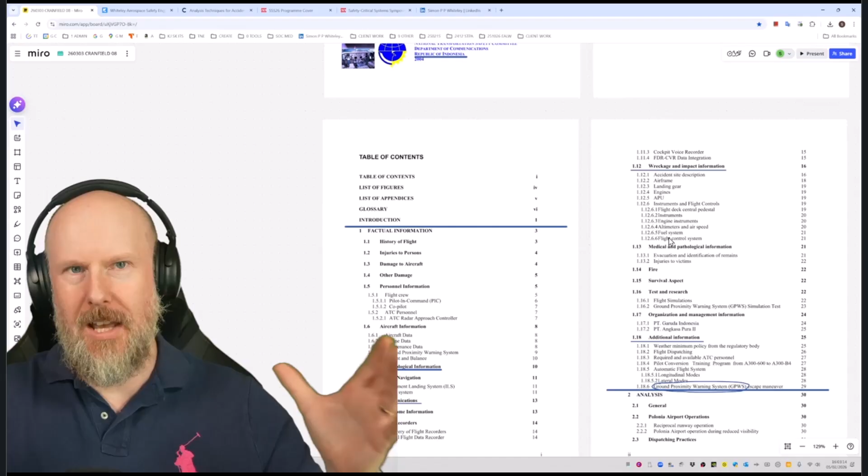In case you're not aware, this type of air accident report has essentially a standard structure, as most civil air transport investigation reports have, because they're created in accordance with ICAO Annex 13, which gives guidance on how to conduct an investigation and what a standard report structure should be.

Now, we've already been through section 1, which is the factual information. If you want to go back and watch that again, please visit live stream number 1 and live stream number 2. I think there's some links in the comments, but if not, I'll add them immediately after this session.

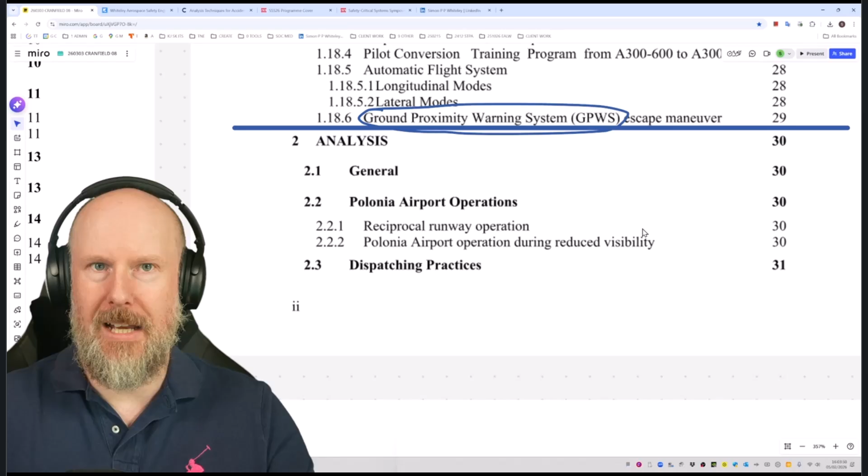Then we've got section 2, which is the analysis done as part of the investigation. We got through all of that in live stream 3 and then 4. So today we're going to be focusing primarily on section 3 conclusions, section 4 recommendations, and of course if you've got any questions, comments, concerns or experience you want to share, please type them in the chat and I'll get to them as best I can.

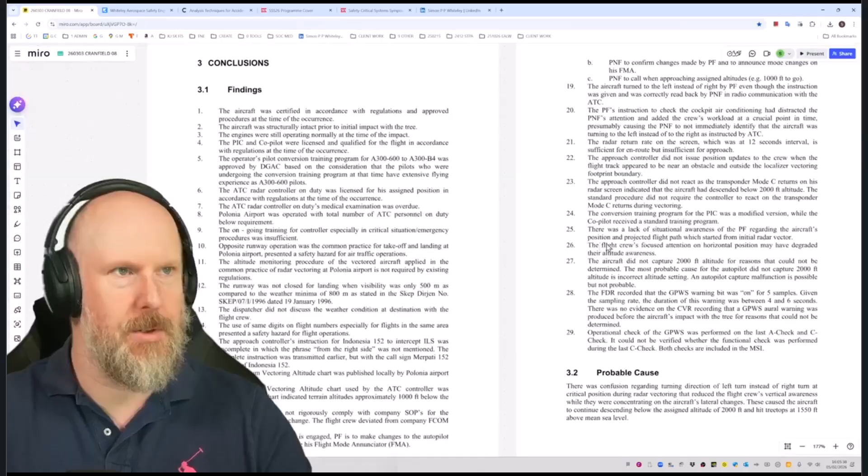Let's zoom in on here so you can see it. So this is section 3, conclusions. The first part of that is findings, section 3.1.

Now it's important to understand, and it goes without saying, but I need to say it: this investigation was done back in 1997, 98 onwards, so it's a good few years ago now. And of course, they haven't used the STAMP-based approach, CAST or STPA or anything like that. So as we're going through this, we just have to be mindful of the context of that investigation, because of course we're looking at it through a different lens, so we're going to think about and focus on different things. My comments are not criticisms of the original investigators or their investigation - I'm just looking at this through the perspective of if we were to apply CAST, STPA, STAMP today, what are the kind of questions we would ask, equipped with that capability?

So, number one then: the aircraft was certified in accordance with regulations and approved procedures at the time of the occurrence. So that's a certified aeroplane. But then, being a little bit facetious, so was the 737 Max. But we won't talk about that today.

The aircraft was structurally intact prior to the initial impact with the tree. The engines were still operating normally at the time of impact. The pilot in command and co-pilot were licensed and qualified for the flight in accordance with regulations at the time of the occurrence. I touched on this yesterday.

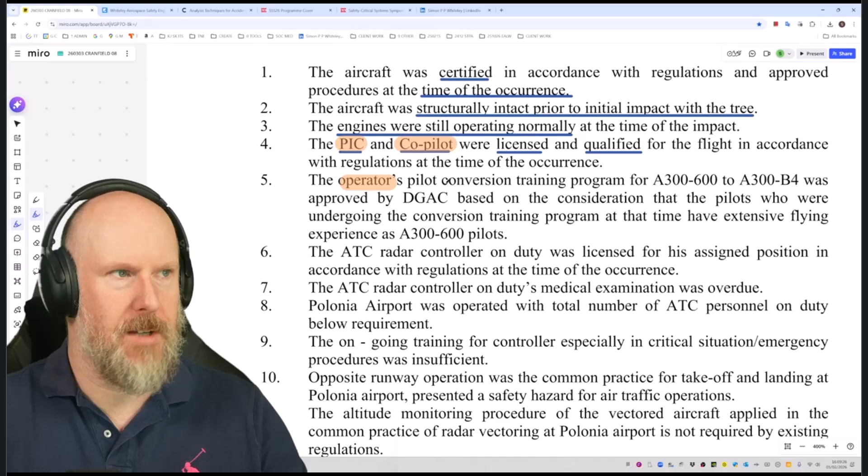Okay, the operator's pilot conversion training - the operator is certainly a controller that's going to appear in the control structure, and they have a pilot conversion training program. I'm highlighting them as a candidate controller because that training program isn't just going to be some training materials, a slide pack and an instruction manual - it is a program, so it's perhaps going to have a training organization, it might have a testing, qualification and certification organization. So I'm highlighting that because I'm probably going to have to dig into that, or at least think about digging into that.

They recognise that there is a training conversion program from A300-600 to A300B4 - these are two different marks of the same aircraft, if you like, with different human-machine interfaces, as I highlighted earlier on. And it was approved by DGAC, which is an Indonesian organisation.

They might be relevant for my control structure, but I'm thinking they're probably not, so I'll highlight it but not include it. That's why it's yellow. Based on consideration that the pilots undergoing the conversion training program at that time have extensive flying experience as A300-600, so having extensive flying experience is important context.

Okay, so the ATC radar controller - they are absolutely going to be in the control structure model, 100%. On duty, was licensed for his assigned position, in accordance with regulations at the time of occurrence.

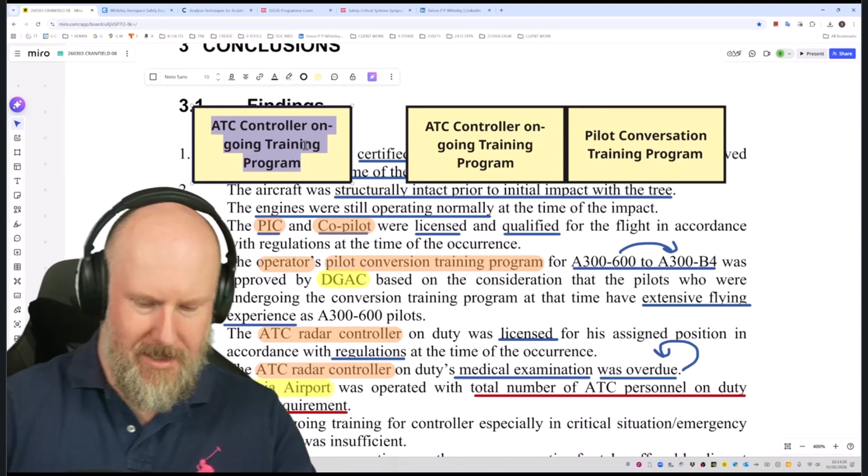We could put the medical examination on there just for completeness. There we go, examination process - let's just change that one there. That's the ATC medical examination process. We've already got the airport management, but I'll stick that in there now while I'm at it, because I don't want to miss it, for the purposes of this presentation, this live stream. Airport ATC leadership. There we go, so that's in there.

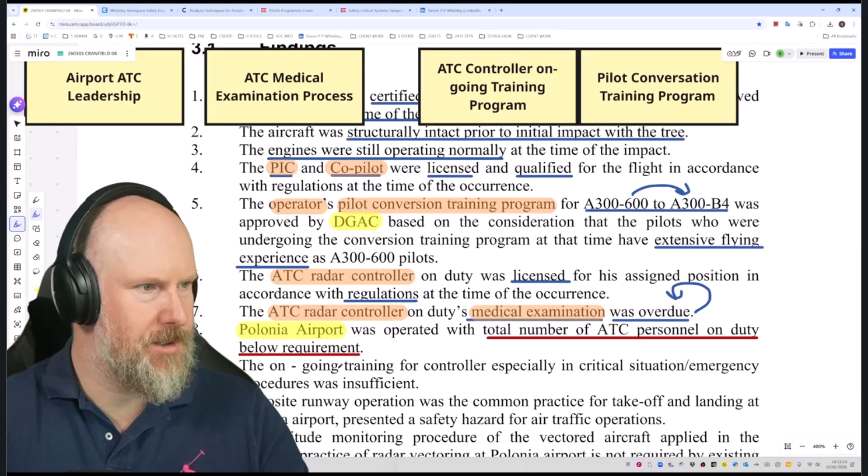Let's put that there. Ongoing training for the controller - yeah, we've just highlighted that, so let's change that orange. Especially in critical situation emergency procedures was insufficient. So should I mention those procedures? Yeah, why not, let's do that. Let's stick that in - ATC critical situation emergency procedures.

Opposite runway operation was the common practice for takeoff and landing at Polonia Airport, presenting a safety hazard for air traffic operations. So let's highlight that - opposite runway operation. Now, whether it's a safety hazard or not, there's a bit of an academic perspective to this, because clearly they can operate takeoff and landing in opposite directions. It's just probably not such a good idea, especially under certain conditions.

But there should be, in theory, an ATC airport analysis that covers that situation, and they may have, should have, would have, could have - I'm implying because I don't know, but it's likely, hopefully, that somebody did a safety assessment for that, and the outcome of that safety assessment, because they were operating, was acceptable to somebody. Whether the risk was actually appropriate or not from an independent perspective, perhaps not. And I think that's what this is implying - it probably isn't a good idea to be doing that, but that's how they've presented it.

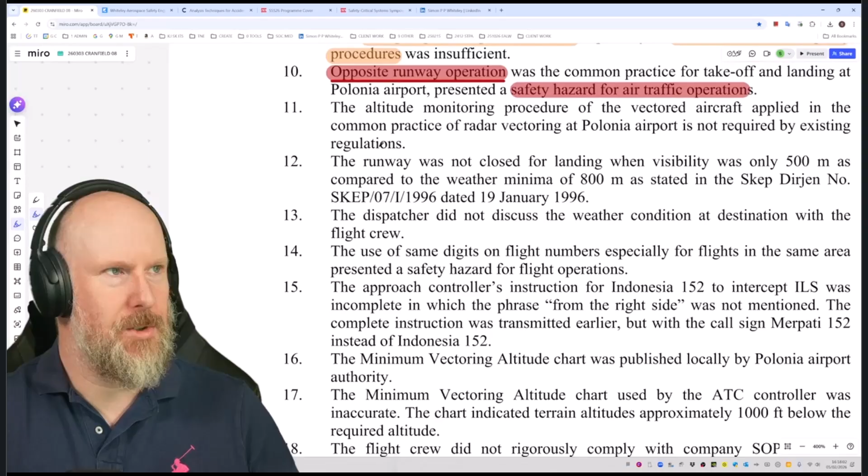Okay, so the altitude monitoring procedure - I'm going to stick that in the control structure, maybe I probably am. Let's stick it in: altitude monitoring procedure of the vectored aircraft applied in the common practice of radar vectoring at Polonia Airport is not required by existing regulations. Is this an ATC procedure?

I think that's what it's implying - of the vectored aircraft applied in the common practice of radar vectoring at Polonia Airport is not required by existing regulations. So does that suggest that there is something missing from the existing regulations?

Where's that just gone? Right - ATC altitude monitoring procedure, let's stick that up there. There we go - is not required by existing regulations. So does that suggest there is a hole in the regulations? Perhaps there should be. So there's a question there, let's capture that question.

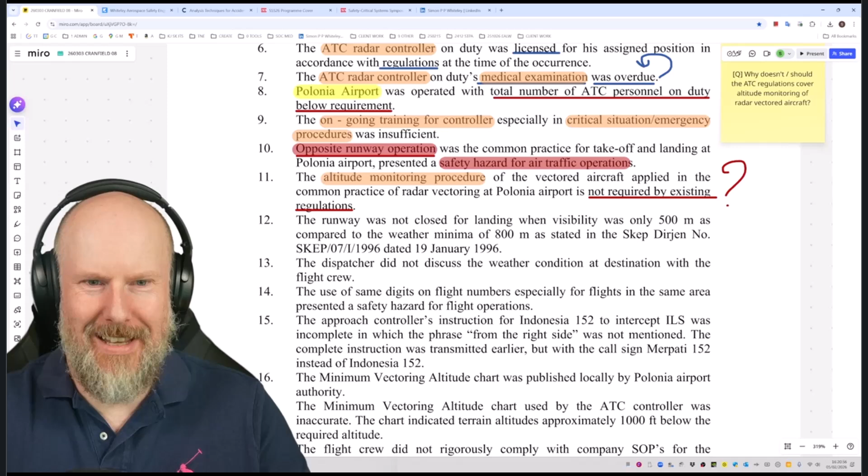Okay, someone's saying something - Florian says, let's have a look. Where's the... got too many screens open. Right, this one, where's my mouse? It's here somewhere. There it is, I found it. Right, what does this say? It's slightly off the screen, so I think I'm going to have to read it out when it works.

Florian says: I also don't know, but I would assume that switching the direction needs time buffers, safety margins between aeroplanes coming from different directions, and this would ultimately be not efficient for most airports today. Yeah, totally on board with that. Therefore, looking at flight radar and so on, I never saw that. Thanks Florian, fantastic.

Right, so let's keep going. The runway - here we go, this is important - the runway was not closed for landing when visibility was less than 500 metres. That is one of the big questions from an airport leadership controller perspective: why did it make sense not to close the runway, even though government regulations suggest they may close it? It's probably a good idea during that context. So that is a contributory control action, let's capture that while we're at it.

I don't know what the number is, so we'll come up with that later on. So this is the airport - oh, don't crash on me now, Miro, come on. Airport - I think it's authority, I think that's the term we used the other day.

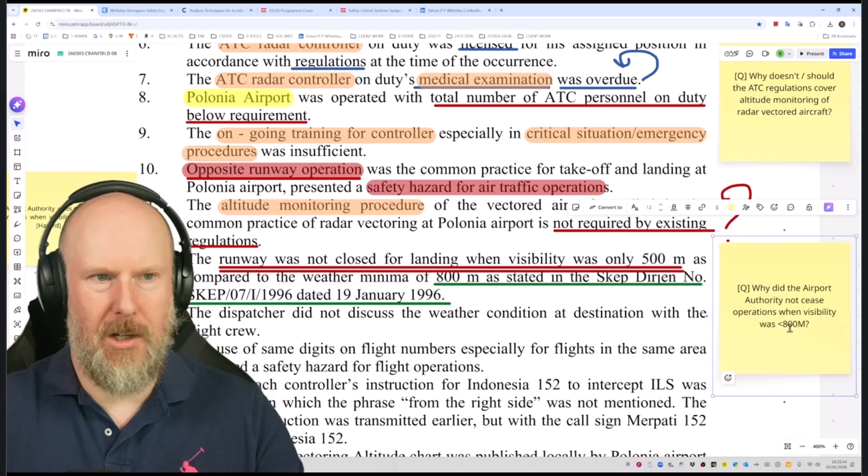Visibility, what was going on? What was the context within which that decision was made? Now, I'm not absolving the fact there may be some serious issues going on, but of course we've always got to be open that perhaps there's a genuine reason why they believe they didn't need to close the airport, for whatever fantastical reason. We don't know yet. We don't know. Okay, so the dispatcher.

So let's highlight that. I think they may need to go into the control structure, maybe, perhaps. I've captured them earlier on, but... well, yeah, let's include them. It says that they did not discuss the weather condition at the destination with the flight crew. So you could say, is that a contributory control action? Let's just capture that.

Airline dispatcher does not discuss destination airport weather conditions with the flight crew when destination weather is out of limits, trending out of limits, or actually out of limits. So I'm going to make that as generic as I can. Is that a bit too small on the screen actually? Let me make that a bit bigger. There we go, 18, that's a bit bigger, isn't it? Let's make those 18 as well. No, that's a bit too big now. 14, 18, no! It doesn't like that. Okay, Miro, come on. Let's just put auto then, fine. Size, auto, there we go.

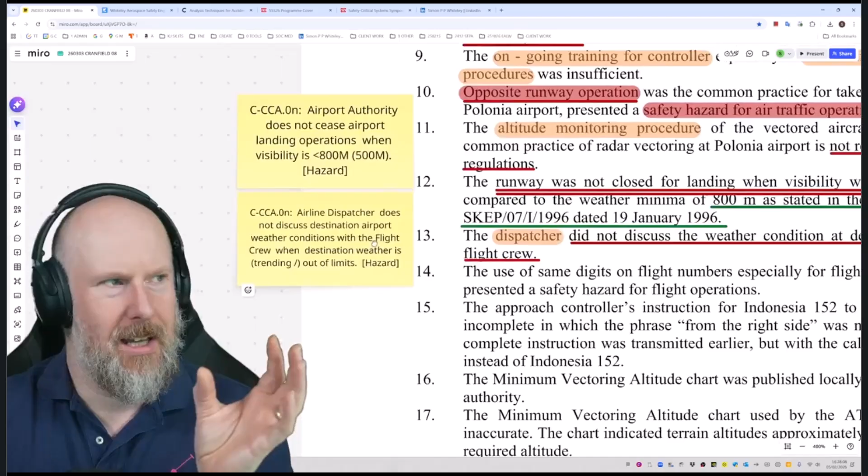Airline dispatcher does not discuss destination airport weather conditions with the flight crew when destination weather is trending or out of limits. And you'll notice I put double spaces in there. The reason I include double spaces whenever I'm writing control actions or unsafe control actions is they help you see the parts of a control action. There's a formal specification to an unsafe control action or a contributory control action, and that is broadly: the controller we're interested in provides a specific control action when, and then a specific context. The context is what makes that control action unsafe. So whenever we're thinking about what is an unsafe control action, we have to think about the compound of the control action itself with a specific context. That context relates to the control process of that controller or of the overall control process for the control structure model you're creating. It can be quite challenging defining contexts, and it's a common issue everybody has. If you've got any questions about that, please feel free to reach out to me.

Okay, so the use of same digits on flight numbers, especially for flights in the same area, presented a safety hazard for flight operations. There we go. And just to emphasize, the word hazard, that label for the concept, is not the same concept when we talk about hazard in STAMP. That's why I use square brackets all the time, to emphasize whenever you see my work and I use square brackets, I'm referring to the specific definitions used in the STAMP literature, the STPA handbook. Because hazard can mean many things to many people, all the way from literally anything that has the potential to cause harm, which is a very broad, unhelpful definition. In fact, it leads to people getting distracted and going down a path that wastes a lot of time and resources and takes it away from actually dealing with proper hazards.

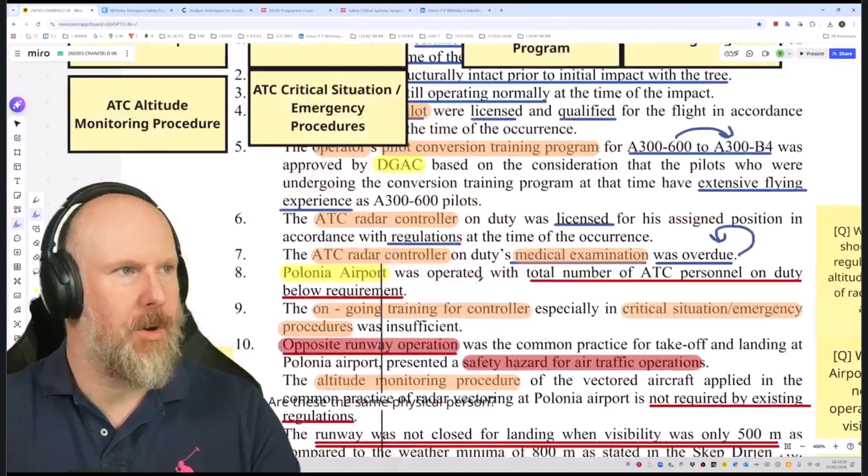Fantastic. So the minimum vectoring altitude chart was published locally by the Polonia Airport Authority. That is the formal label for this controller up here. So we've got ATC Airport Leadership - that should probably be called Polonia Airport Authority.

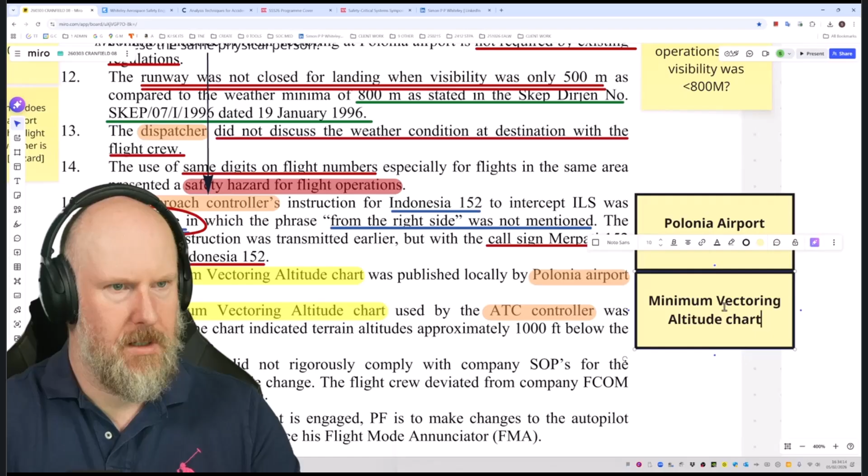There we go, so let's put that there. The minimum vectoring altitude chart was used by the ATC controller, and that influences the air traffic controller. So where are they? Let's put that in there - used by the ATC controller, was inaccurate.

So it was inaccurate anyway. The chart indicated terrain at altitudes approximately 1,000 feet below the required altitude. Wow, that's quite bad, that's not good at all.

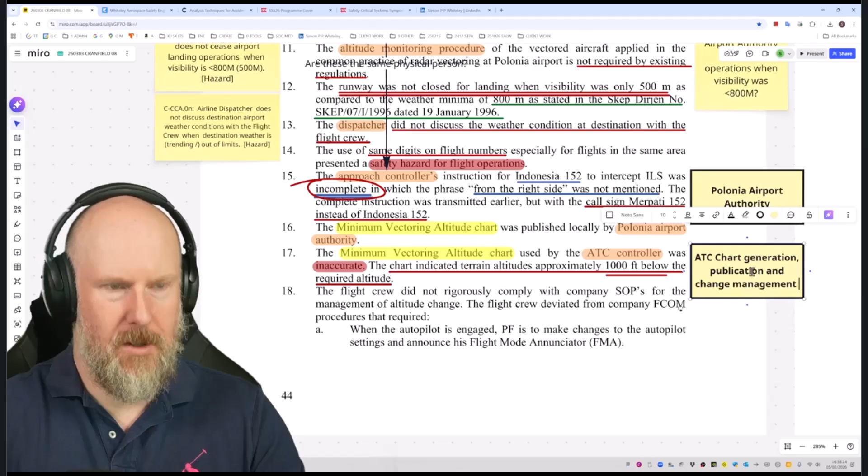Okay, so for it to be so wrong, clearly the investigation should consider looking at the ATC chart generation, publication and change management organisation, whoever, whatever they are. I know that's a bit of a broad, wide definition, because I'm not an expert in this field - if you know a better definition. That could be an airport organisation, it could be a combination of airport personnel and maybe the national air traffic provider or government regulation, or it could be a private company external to the airport who creates the charts. And so that question of what is the controller involved in the creation of those charts and the change management of those - that could be a whole new branch, maybe even a new part of the investigation.

In fact, one of the CAST investigations done by Paul Nelson that's on the MIT website - I think it was a Comair accident at Lexington Bluegrass Airport in the US, where the aircraft took off on either a closed runway or a taxiway. They took off on a runway that was too short. The reason was because the chart describing the layout of the airport didn't contain information about some groundworks going on. So they thought they'd gone on to the main correct length runway, but in fact they'd stopped short and gone onto the shorter runway, which goes off in a slightly different direction. They didn't recognise that situation, and that's what set the scene for the accident. In that case, I think it was Jeppesen charts - there was a question over the currency of those charts, and this is the same sort of topic.

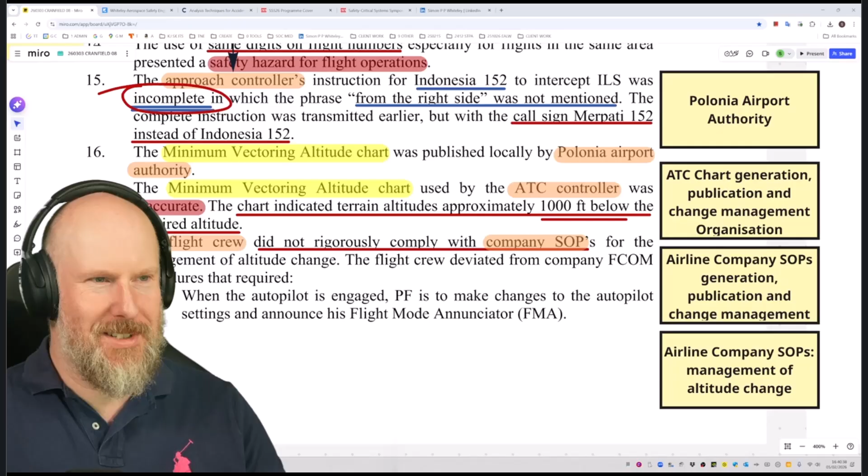It's fantastic. But of course, it means you can spot things really quickly, and sometimes people might not like that. They might get a little upset that you're pointing at things they might not want people to recognize, or there might be issues that have been put on the too-hard pile and forgotten about. And you, as a fresh-faced person with fresh eyes, spot these things from round corners, and they just get a bit upset that you're pointing at these things. But yeah, that's one of the challenges with this method. But that's what you want - you want a method that can do that.

Okay, so the flight crew did not rigorously comply with company SOPs for the management of altitude change. The flight crew deviated from the company FCOM procedures. Right, so let's put that one there - airline company FCOM procedures. There we go. So I'm going to put airline company SOPs, manuals, procedures, management of change. There we go, yeah, that'll do.

Hang on a minute, have I just ruined something? I have, haven't I? Let me just undo that. No, that was right, wasn't it?

Airline company SOPs generation, publication and change management organisation. And then the ATC chart generation, publication and change management organisation. So they are two organisations. And we have the airline company SOP manuals, and then we have the company FCOM procedures. The ATC one's disappeared, hasn't it? Oh no, it's over there. Altitude monitoring procedure, yeah, okay.

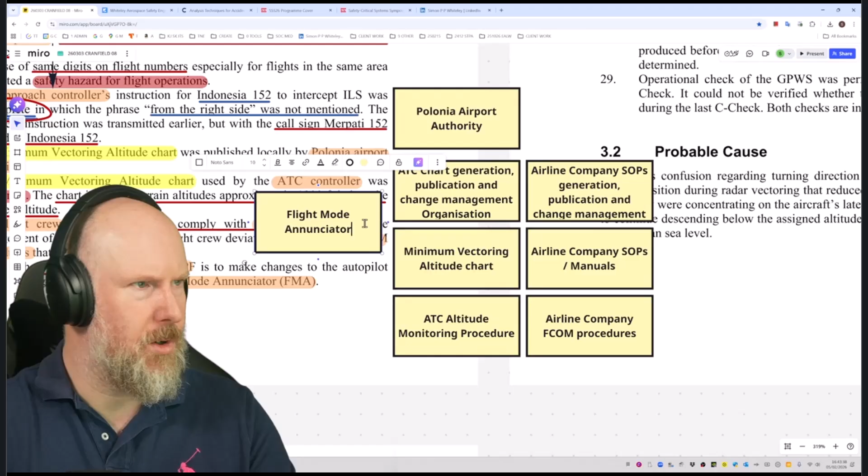So let's... flight mode... I can't remember how to spell annunciator. There it is. Annunciator. FMA. Okay, so that might be important.

So there's sort of two control actions there, broadly speaking. You've got the first one, which is make changes to the autopilot settings, and then the second one is announce his flight mode annunciator. So he might have done the first but not the second, or he might not have done either. And there is a sequence dimension to that as well, because there's always the possibility logically that someone could announce the change but not actually complete the change properly.

Okay, so let's have a look. Pilot not flying - so they are definitely in the control structure - to confirm changes made by pilot flying and to announce mode changes on his FMA. So there's two of those: confirm changes, announce mode changes. So the pilot not flying, to call when approaching assigned altitudes.

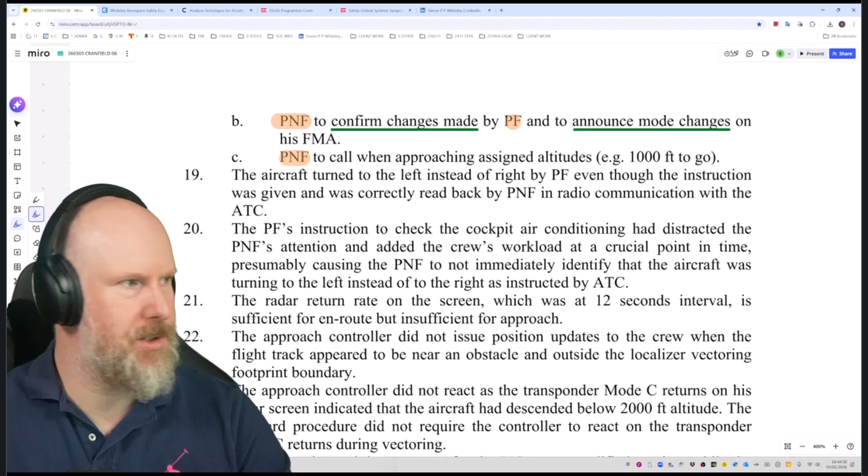And they didn't do that, I don't believe. The aircraft turned to the left instead of the right by pilot flying, even though the instruction was given and was correctly read back by the pilot not flying in radio communication with ATC.

The pilot flying instruction to check the cockpit air conditioning had distracted the pilot not flying's attention and added the crew's workload at a crucial point in time, presumably causing the pilot not flying to not immediately identify that the aircraft was turning to the left instead of the right as instructed by ATC.

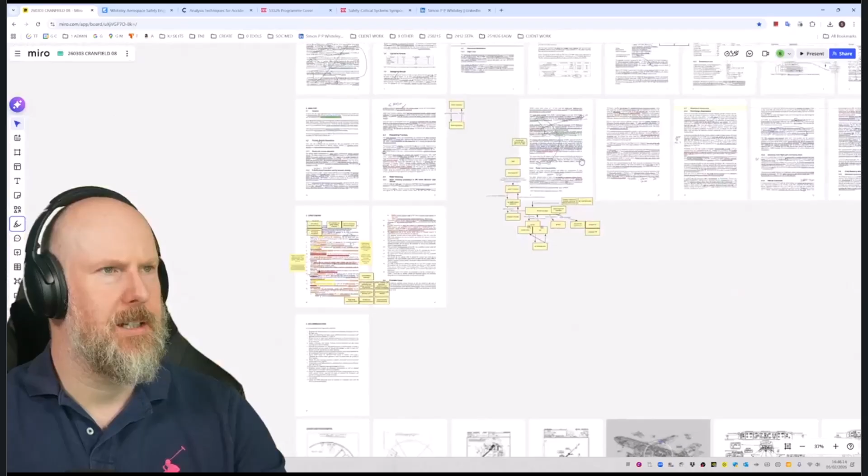The radar return rate on the screen - so radar, that is in the control structure elsewhere, I think. Let's just zoom out, have a look. Oh, we've added there the feedback loop. Radar controller, radar speed 5 RPM, 12 seconds. So we've not actually included the radar as a specific sensor. And that's, in fact, a good point, actually.

So one of the questions is: is a radar a sensor or is it a controller? It kind of depends how you as the analyst or modeler want to include it in your control structure. So you could just treat it as sensory feedback from the control process, or you could treat it as an explicit sensor. But you could also treat it as a pseudo controller in the case where you can change the settings of the radar. I don't think it's mentioned in this case, but some radars you can turn different settings on and off. So there is a control algorithm of some description in terms of what type of behavior that radar might have.

But again, ideally you should just treat it as a sensor, but it depends if it's relevant to your investigation. If there's an issue with the radar, you might want to look into it, model it explicitly and add detail. So let's have a look. So radar, the radar return rate on the screen, which was at 12 seconds interval, is sufficient for en route air traffic control, but insufficient for approach.

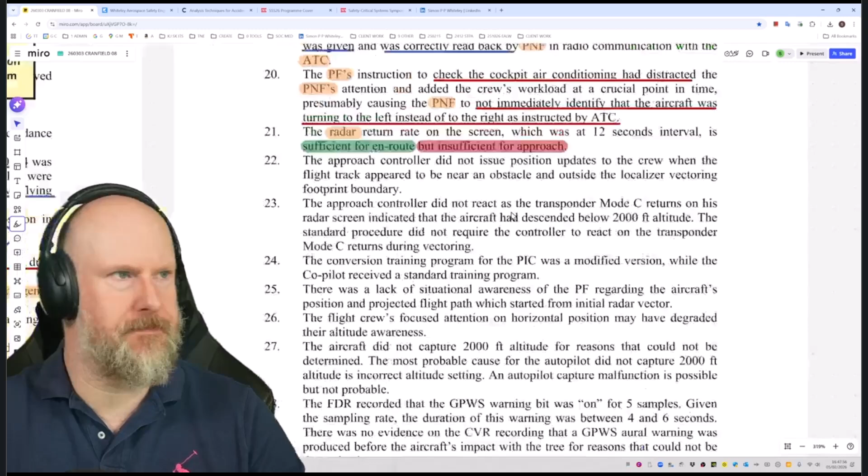Okay, so let's have a look. Polonia Airport Authority - why was the radar with, what did we say, it was 12-second interval? Can you see that? Okay, let me zoom in. Why was this radar with 5 RPM, 12-second interval in use for use in this type of radar vectoring air traffic control?

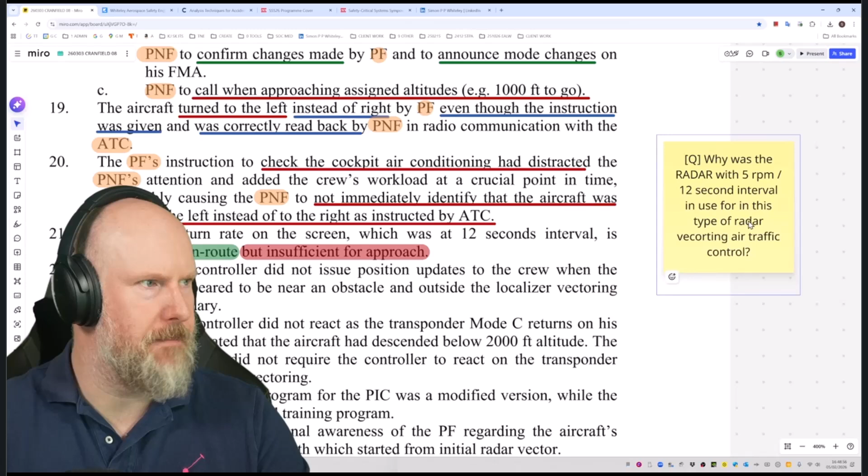There we go, so put that there. Okay, the approach controller. Let's just check that - approach controller, radar controller, approach controller. So the same name, is it the same person? Did not issue position updates to the crew when the flight track appeared to be near an obstacle and outside the localizer vectoring footprint boundary.

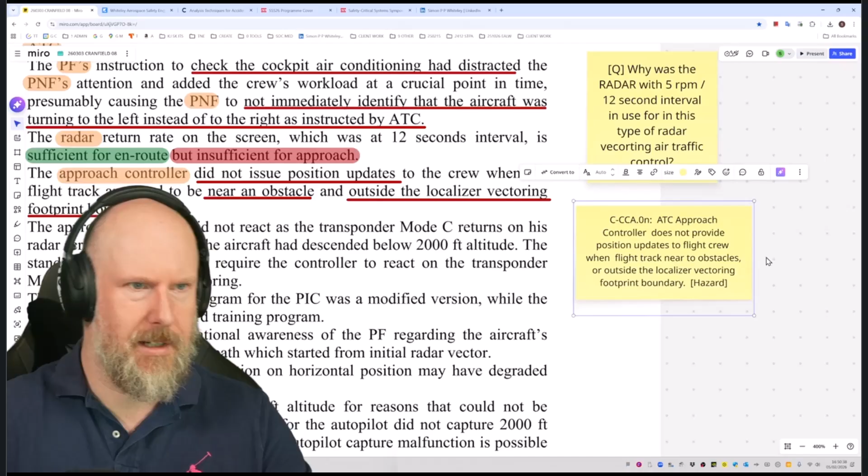So let's... oh, no, not that one. Let's put another contributory control action there: ATC approach controller does not provide position updates to flight crew when track near to obstacles or outside the localizer vectoring footprint boundary. So ATC on approach does not provide position updates to flight crew when flight track near to obstacles, or outside the localizer vectoring footprint boundary.

So why is that? Okay, right, let's have a look. The approach controller did not react, as the transponder mode C returns on his radar screen indicated that the aircraft had descended below 2,000 feet altitude. So let's document that one.

ATC approach controller does not... well, what is the reaction? What do they need to do? Does not provide TBC reaction when transponder mode C returns indicate aircraft below 2,000 feet altitude.

So ATC approach control does not provide TBC reaction, because I don't know what that reaction is. Presumably it's, I don't know, get on the radio, climb, pull up, I don't know.

When transponder mode C returns indicate aircraft below 2,000 feet altitude, I'm presuming - and correct me in the chat if I'm wrong - it's the information from the aircraft transmitted to the secondary surveillance radar, and then that information appears on the ATC controller's workstation radar screen. So Flight Radar 24 shows information about altitude, track and speed - that is transponder derived information. I think that's how it works.

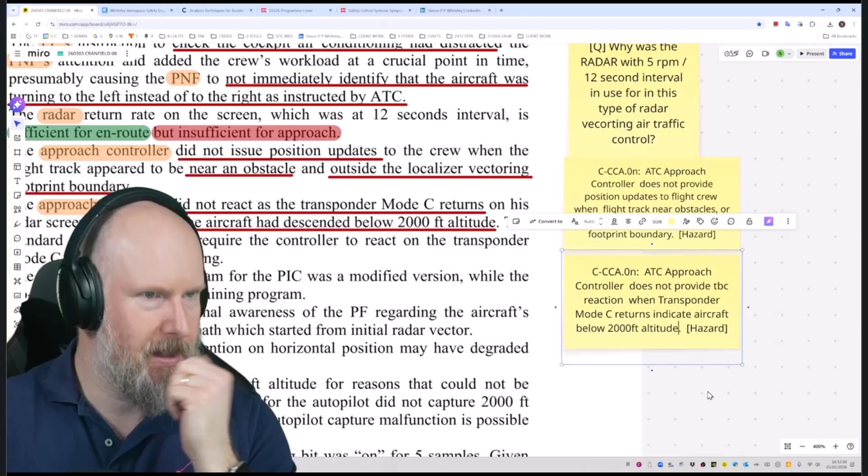So why didn't they do that as well? The standard procedure did not require the controller to react - well, that's why then. That explains why. So they did not provide TBC reaction because they're not required to. So is that an issue? Is that a problem for the controller? They didn't do what they should have done because they weren't told to do it?

So the standard procedure did not require the controller to react during vectoring.

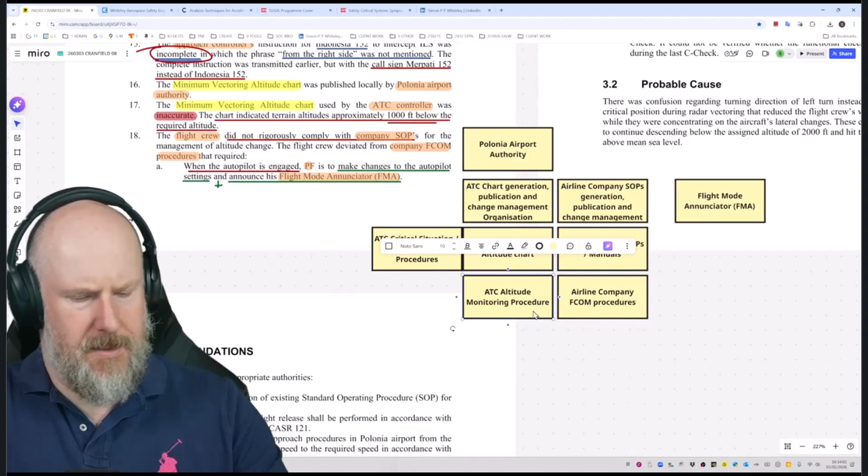So standard procedure, where is it? ATC, minimum vectoring altitude chart, monitoring procedure, emergency procedures. Let's put that over here as well. Flight mode annunciator. So, emergency procedures, vectoring chart, altitude monitoring procedure. I think that's related to this, isn't it? Yeah, I think it is. Okay.

The conversion training program for the pilot in command was a modified version, while the co-pilot received a standard training program. Okay, so that's interesting. I think we're going to have to think about that, add that to the control structure. So we've got a pilot conversion training program, and we've also got a pilot standard training program.

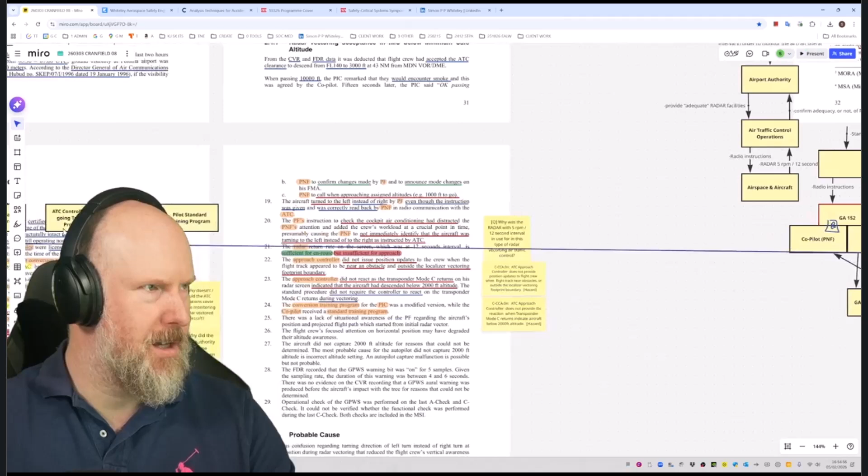Yeah, okay, so the pilot in command - pilot in command is there and there. Right, let's steal this arrow. There we go. So pilot in command received the modified version - conversion - and the co-pilot received a standard training program.

Interesting. Why was that then? And does it matter? Does that matter? Potentially a contribution. Yeah, so there was a lack of situational awareness - everyone's hot topic, what does situational awareness actually mean - of the pilot flying regarding the aircraft's position and projected flight path, which started from the initial radar vector.

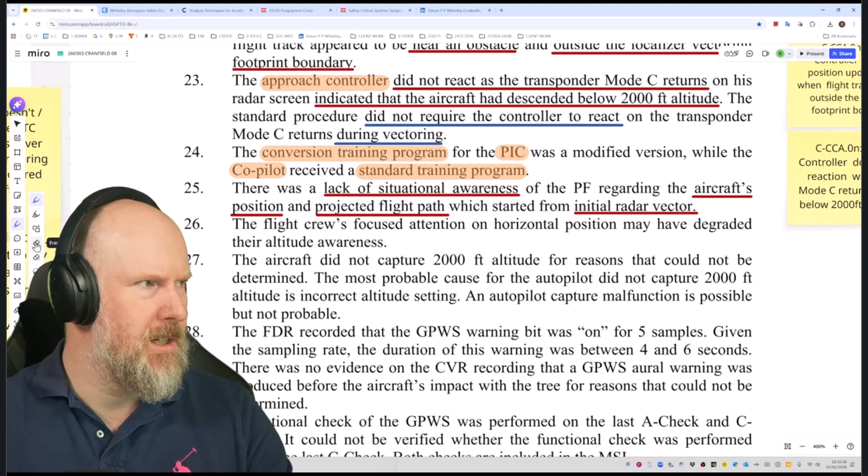So when we talk about lack of situational awareness, what we're sort of hinting at is there are issues with the mental model, the process model, the beliefs of that particular controller. In this case, it's the pilot in command, the pilot flying, who was the pilot in command at the time.

The flight crew's focused attention on horizontal position may have degraded their altitude awareness. So again, that's human factors aspects - distraction, focused attention.

The aircraft did not capture 2,000 feet altitude for reasons that could not be determined.

So if you watch the last Livestream 5, we did talk a bit about the control loop for the GPWS ground proximity warning system, but also the autopilot flight control system. I think there were sufficient questions over the behaviour of that which might have warranted, with hindsight, knowing what we know with STAMP and CAST, a more detailed investigation of that, instead of being given the line that the probability of that scenario is 10 to the minus 10 or whatever ridiculously small failure rate number it is. Because there may have been a systematic design issue with the design of that system, which is what is hinted at from looking at it through the lens of a control loop.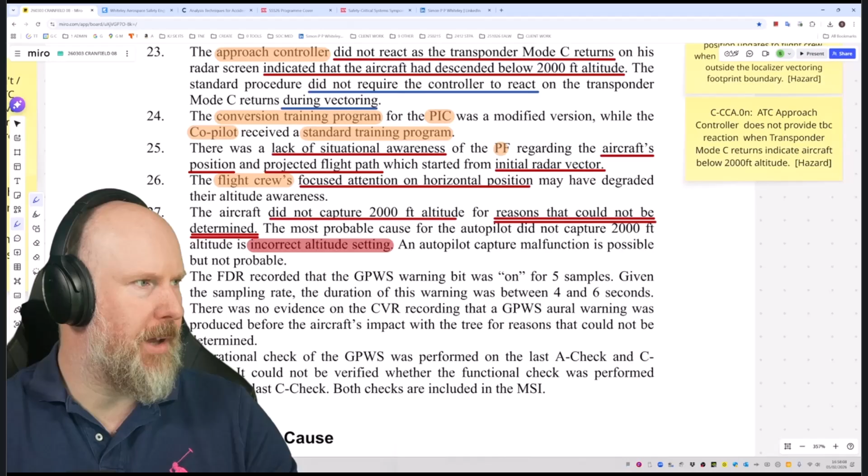But of course we don't have enough technical detail in this report to really look at that in a lot of detail. Okay, so the most probable cause for the autopilot not capturing 2,000 feet altitude is incorrect altitude setting. So that is a control action from the pilot in command or the person interacting with the aircraft. An autopilot malfunction is possible but not probable.

Okay, so I think what we should do is consideration should be given to the control loop for the autopilot, and how a contributory control action might occur.

We touched on this last time on Tuesday, so if you want to go back and watch that replay, you can. It's quite interesting actually. I think there's potentially a missed opportunity there to look in more detail. But we're saying this with hindsight, and we haven't seen the detail of what these investigators did behind this investigation report, because they're not going to publish everything. They'll publish enough to show what they've found, but not necessarily everything that's not relevant. So I could be asking questions that are answered, but just not in the official investigation report.

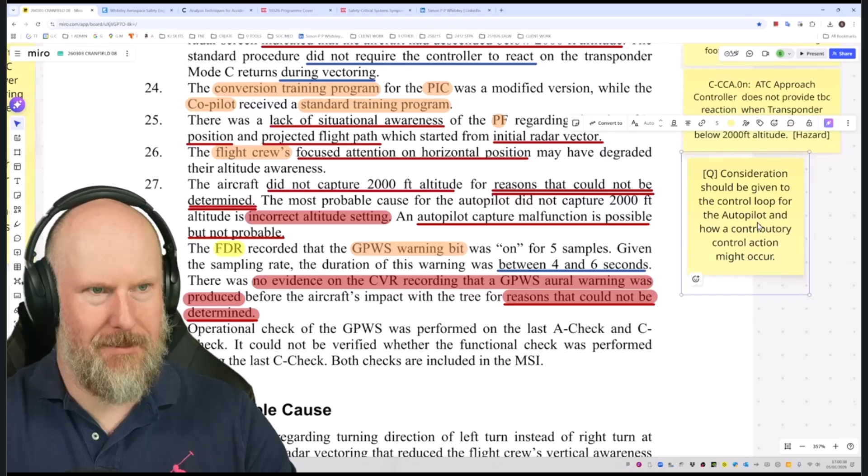There was no evidence on the CVR recording that a GPWS aural warning was produced before the aircraft's initial impact with the tree, for reasons that could not be determined. So that is certainly prime for consideration - consideration should be given for the GPWS and how...

There we go. There is obviously an academic question there over - well Simon, is a GPWS aural warning a control action? Well, it's kind of six of one and half a dozen of the other.

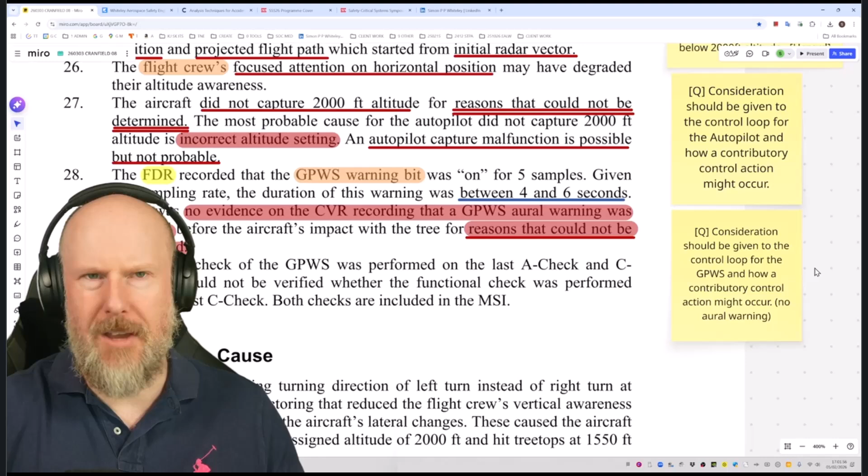If you want to do a good analysis of the design of a GPWS, you'd treat it as a contributory control action, or an unsafe control action if you're doing an STPA. So the GPWS does not provide aural or visual warning when certain context is met, and you would explore the control loop for that and identify the causal scenarios that lead to that. Now, of course, if you treat it like a feedback, that is a contributory causal scenario of the human operator not providing the control actions they're supposed to. So you would identify the contribution, but it makes sense to analyse it as though it is a contributory control action, if that makes sense. It's kind of six of one and half a dozen of the other.

So then the operational check of the GPWS was performed on the last A check and C check. It could not be verified whether the functional check was performed during the last C check. Okay. Both checks are included in the MSI.

What is an MSI, everybody? MSI, maintenance specification item - there we go, that's what that is. So both checks are included in the maintenance specification, whatever it was.

Right, so there is a question there over what is the control structure for providing the GPWS operational check, and why could it not be verified that the check was performed during the last C check?

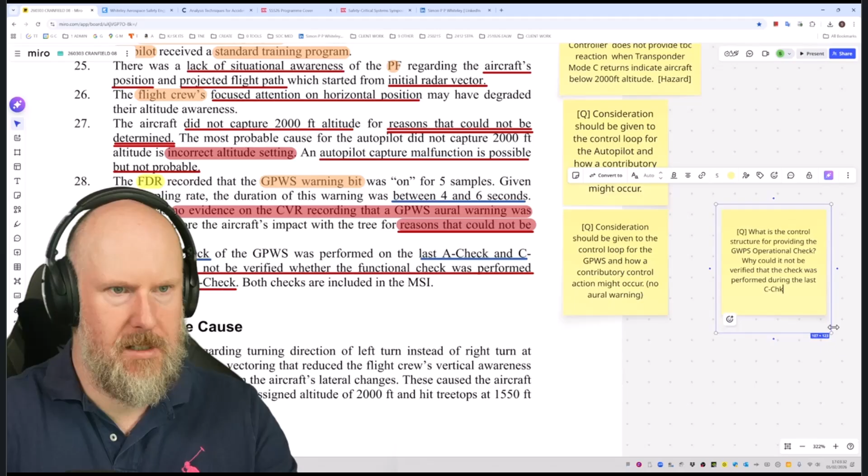So that's something you could explore with a control structure model. There isn't enough information in this investigation report to really talk about that, other than to say here's a GPWS that needs checking. What is the control of the maintainer, the maintenance group, the maintenance organisation that provides that functional check? What or how is that documented or captured? So what is the documentation system, or the way that they keep track of these things? Because this could be a one-off for this one thing, but it could also be a maintenance issue that doesn't just affect these kind of checks, but other more serious checks.

If there are more serious checks, other checks as well, one of the recommendations I'd argue should be: let's go and have a look at the maintenance organisation. Let's have a look at how this check was not verified - is it just a documentation issue, or is there a wider systemic issue here? Okay, so that's all of that stuff.

The probable cause then - just before I go into that, let's hold that for a second. Given all of the things we've done in the last four, and now this fifth live stream, and building bits of control structures, we're going to draw them together after this.

But I'm hoping you can see that the approach to doing a STAMP-based analysis, and thinking about things through the lens of a control loop and a control structure - a jigsaw piece and a jigsaw - can really open up the creative thinking and identifying questions that you wouldn't normally think to ask. I'm hoping that's sort of apparent.

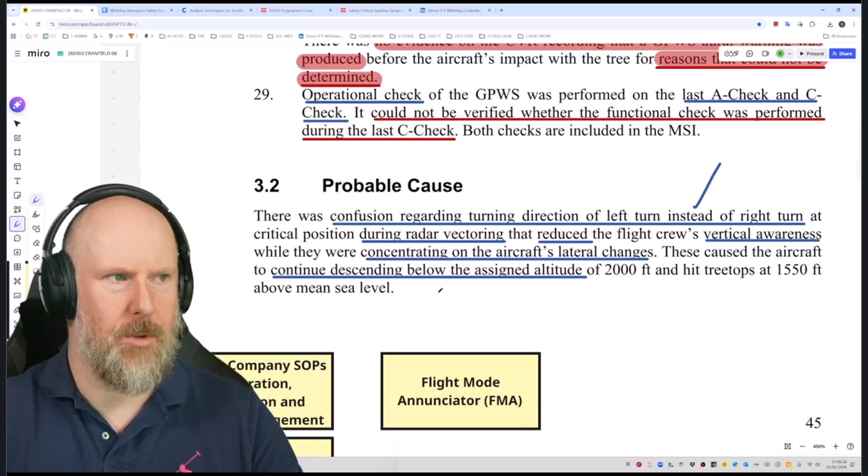Okay. So that is, in terms of time and proximity to everyone being killed and the aircraft being completely destroyed, you can't really argue that there are not issues or questions over the behaviour of the crew, but there are also questions over the behaviour and design of the aircraft, in terms of the way that the automation works, the way that the displays and human-machine interface works.

When you step back even further in time and start thinking through the lens of a control structure model, you've then got the air traffic control contribution. You've got the contribution from airport management and their decision for the airport to be open. I'm not going to say stay open, because that presumes they questioned whether it should be open or not, and we don't know that to be true. Maybe they didn't even think about it, it's just we must operate. Maybe they were not aware or didn't consider the limitations due to

the smoke. Now, of course, that's probably not the case, and I'm being a bit facetious in that, but I'm hoping as you start to think about the broader context of the control structure, there are many other things in there, contributors that can have a bigger contribution than others. So that's interesting, that's interesting.

Okay, so there's no mention of the automation, the autopilot or anything like that. That's not discussed, and I can appreciate how challenging it is trying to draw conclusions and say, well, it's this probable cause and then these other contributors. I know that's a difficult thing to do. So as I say, I'm not criticising the investigators and their report.

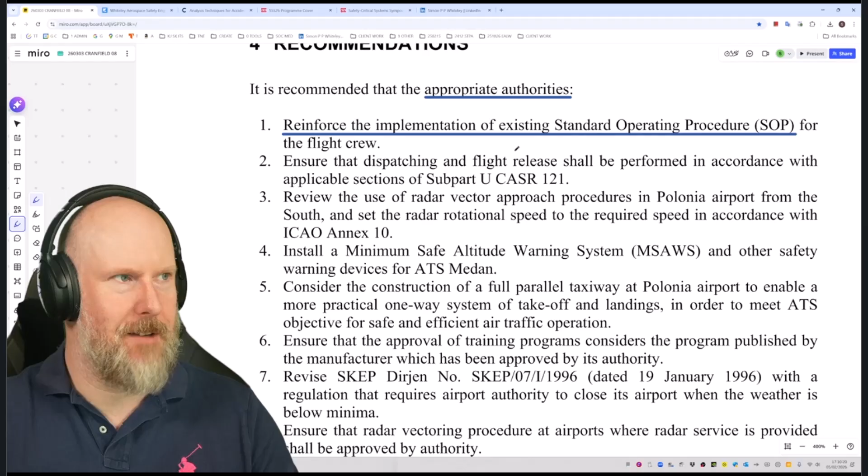So basically make sure the crew know what the SOPs are. Okay, kind of standard. Pardon me. Ensure that dispatching and flight release shall be performed in accordance with applicable sections of Subpart U CASR 121. So I'm assuming that's regulations. So again, that's do more of what you're supposed to be doing, everybody.

No sort of consideration of why they didn't do it like that, you know, or should I say not documented consideration of why. Review the use of radar vectored approach procedures. No. Radar vectored approach procedures in Polonia Airport from the south, and set the radar rotational speed to the required speed in accordance with ICAO Annex 10.

Right, so that's not sort of looked at, you know, there's no sort of investigation, how can I put it, that is not discussed in the investigation report. Why would it make sense for the radar rotational speed not to be set at the correct speed in accordance with ICAO Annex 10? So what I'm going to do is make a good point of this

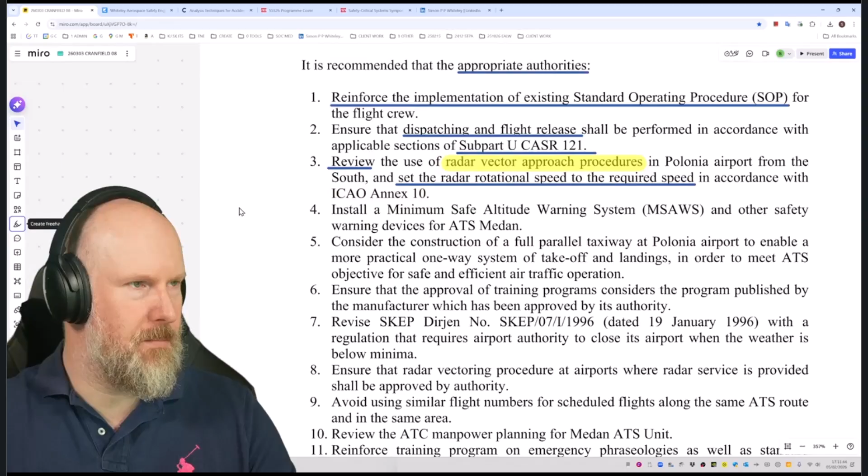just to really stretch your brains. So ICAO Annex 10, and then set the radar rotational speed to the required speed. So this is a control action. This is somebody's control action.

Some real person, real human being needs to set the radar rotational speed to the required speed. So where is that person? Where is the organisation that person represents mentioned in the investigation report?

So if we're building a control structure and we're looking at radar, that radar system is now a controlled process of some radar technician or organisation that sets the speeds of the radar, but also is under the influence of ICAO Annex 10. So why is that control path? I mean, why is it not considered? What is it we should consider? That's one of the things we should look at through the lens of a control structure.

So what I'm going to quickly do is, we mentioned there radar 5 RPM 12 seconds. So if you imagine for a minute that between these aircraft there is a radar system, and I think there's a couple of different radars. There's a primary radar, a secondary surveillance radar, and a lot of other things, but it's a radar system. So above that radar system there will be some kind of radar system management organisation that should set that radar system. Can you see that on the screen okay? Is that big enough for you?

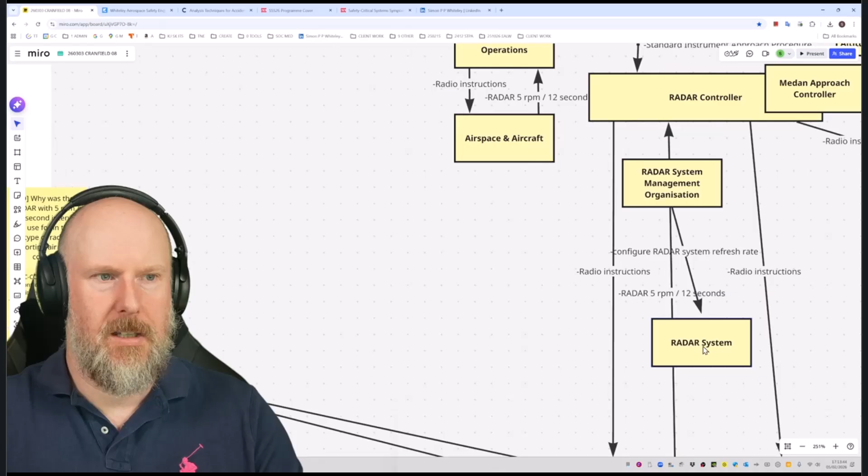So I'll use the term configure radar system refresh rate - I think it's sweep rate, spin rate, something like that. Okay, so that's the control action that this is recommending. So let's put that over there, there we go, it's out of the way. And above the radar system management is this thing called ICAO Annex 10.

Now I'm not familiar with Annex 10, so dare I Google for it. Let's have a look. Annex 10, oh god, it's so complicated. There's so many different things. Which is it? Why can't you just explain? Let's use SKYbrary - no, let's not use that. So obviously it's big and there's a lot to it.

Aeronautical, so there's 19 of these things. So there's volume 1, volume 1, volume 2, volume 2, volume 3, volume 2, 2, 2, 3, 3, 3, 3, volume 5, 4, 4, 4, 5, 5, 5, 6. So it's probably this one, volume 5 - volume 4, surveillance radar and collision avoidance systems, 5th edition. Right, so that's the newest one. Why is that cheaper than that one then?

Right, so this is a bugbear of mine. I'm not going to tear strips off ICAO specifically, because a lot of organisations that set standards and provide documentation, the design of the websites is generally so difficult to understand as a beginner, layperson, and even as experts you can get lost. And the EASA, European Aviation Safety Agency website, is also guilty of this. It's really complex with lots of different languages and standards, and it's just not clear which documents are relevant right now that I should be looking at.

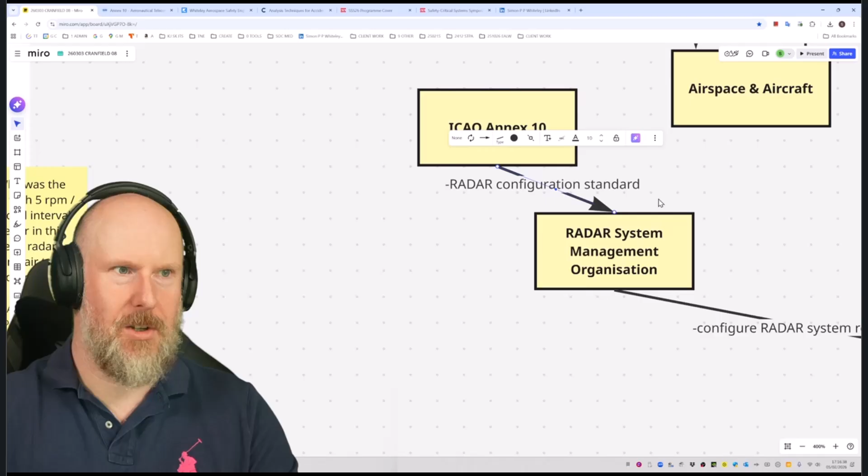I don't know, but let's just say, for argument's sake, that Annex 10 contains information about how to configure radar systems, and it's a standard that you must follow. It's mandatory, let's assume. So if it's mandatory, then why - let's put that there, radar configuration standard, I'm assuming that's what it is. I could probably be completely wrong, but let's assume I'm not. So we've got this radar system management organization who's supposed to be following Annex 10 apparently. I don't know if it's mandatory. So why was the radar system, the contributory control action, why was that not configured appropriately?

Because there might be a genuine reason for it. There might be - maybe it's one of these dangerous successes I always bang on about. It was permitted not to be configured because of some reason that's not discussed or apparently investigated by the report. So our job as CAST-equipped investigators is to go and ask that question: well, why was it not configured that way? If it's supposed to be configured that way, what was going on between the ICAO and Annex 10, and finding its requirements all the way down to the radar system?

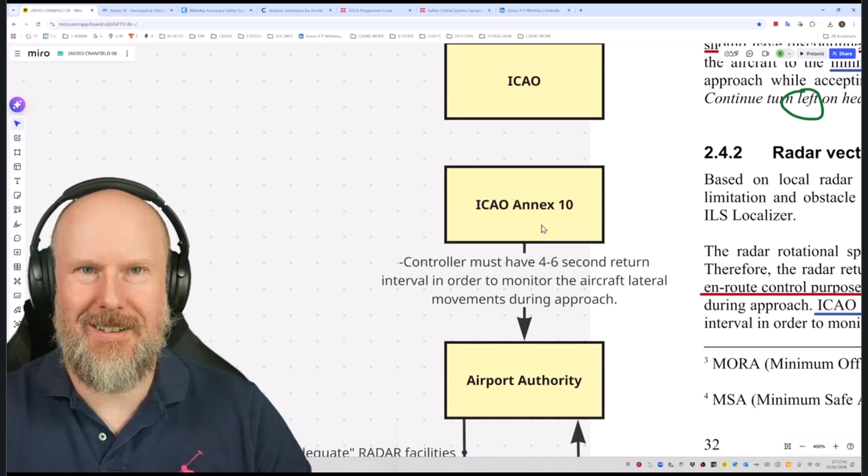What's going on there? That's what we should be looking at, that should be the recommendation. So let's just... oh look, I've already got ICAO Annex 10 in my candidate control structure. Look at that, fantastic, so I've kind of stolen my own thunder from the other day. There we go, let's put ICAO Annex 10 there.

Maybe the control path for ICAO Annex 10 is through the airport authority. We've already seen that there are some contributory control actions related to the airport authority that are not looked at in the investigation report. So maybe this is just a common theme - there are things going on above the airport authority that are just not getting through to the frontline operations when they really should be. As a recommendation, I'd be going and having a look at what's going on there, finding out what is going on. There seems to be a lot of issues at this airport.

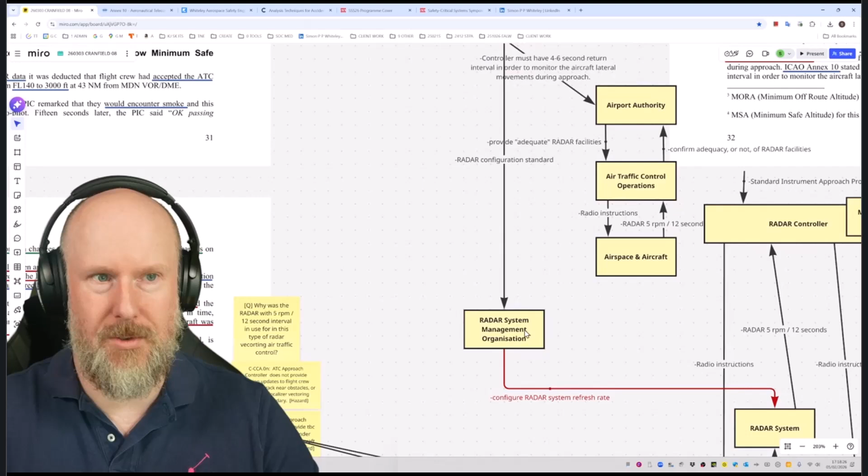I hope that makes sense. I've got a few comments there. We've got Norfolk - let me just get my mouse and put it over there. Do you tend to group the yellow boxes with their associated function?

Yeah, so this is just, how can I put it, my personal preference is to have these, both candidate and certain controllers, in my model, and then mix it together and refine it over time. And then, of course, look at the overall flow of the control structure to make it into a format that makes it easy to explain to other people, easy to communicate to others.

Typically I'll have the control process at the bottom, and as we move up from the direct controllers to the indirect controllers and then the distant controllers in time and space, I will try to group controllers together. In the case of the stuff I've been doing with planetary protection, looking at the design of a spacecraft, I typically group the relevant controllers and information and communication feeds together in a block or area that is common. Where they have common controllers or common management, common leadership, I'll represent them in a box that stretches across the screen.

Because, of course, these are just jigsaw pieces at the moment. When I come to make it into a nice looking, refined control structure model, I am going to change the size of some of these boxes and arrange them in a form that makes it look nice, but also makes it straightforward to communicate and understand. One of the things with these models is you don't want your audience to just have their brains blown out with a massive, complicated control structure model. It really doesn't help, so you've got to think about the audience.

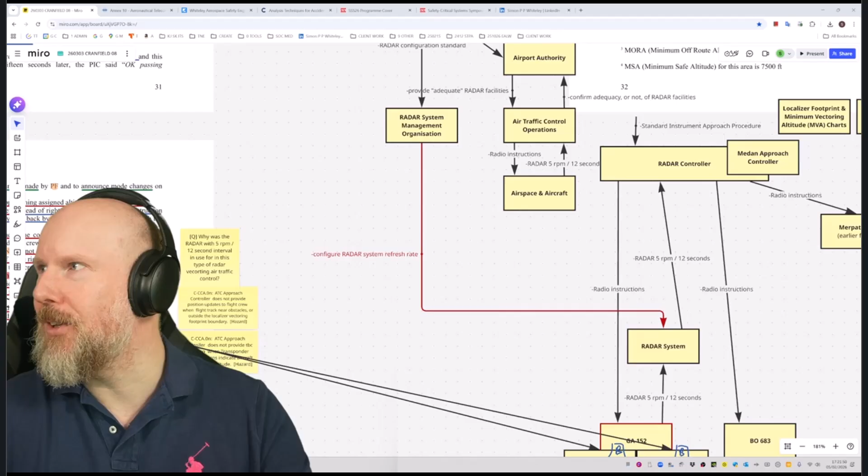I do particularly like your picture, you've got a Nimrod - it looks like an XV. It looks like a Nimrod MR2, or is it an MRA4? Let's have a look at the picture a little bit closer so I can see. It is an MR2, yeah fantastic, one of my favourite aeroplanes, the MR2. Got quite a bit of history with the Nimrod, which I won't go into today, but yeah fantastic. So thank you for that question.

So I banged on about radar systems and Annex 10, so that is a recommendation - they need to review the use of radar vectored approaches and set the radar rotational speed to the required speed in accordance with Annex 10. I would say that should be investigated even further personally, not just 'you need to correct these actions' - I want to know why that was like that.

Northall says, yes thank you, MR2, fantastic, great aeroplane.

Install a minimum safe altitude warning system and other safety devices for ATS Medan. Okay, so it says to install those things. Why were they not present in the first place? Why has it taken a fatal accident for them to decide that's probably a good idea?

And playing devil's advocate, maybe they had a safety assessment that said we need a minimum safe altitude warning system and other safety warning devices for our ATC at this airport. But when that demand was placed with senior leadership, maybe they said no. Or maybe literally next week after this accident they were going to install one. I'm being a bit facetious there.

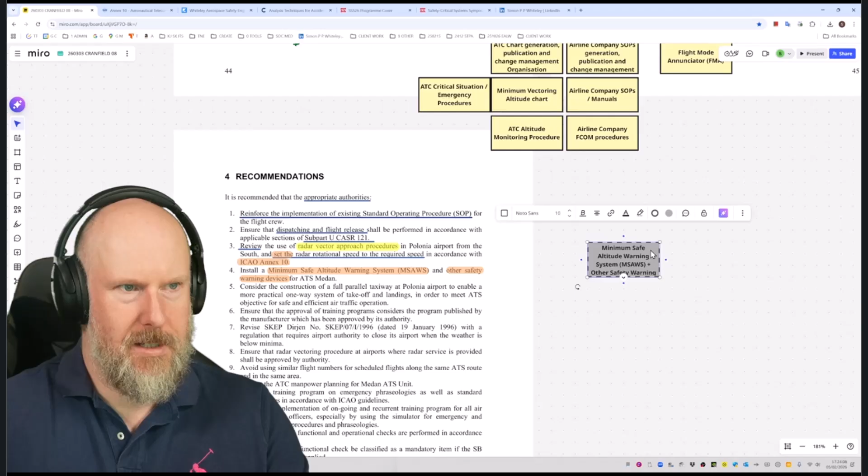MSAWS plus other safety warning devices. I'm going to use a different colour on that, make it grey, and put a dotted line for the border, and make that grey as well. I'm going to make it lighter, because obviously it wasn't there, so it shouldn't be in the control structure because it wasn't there.

It's work as done versus work as imagined. But I'm going to stick it in here just for the sake of saying, well, hang on, they've recommended it should be there. If they recommend it should be there because they think it'll benefit, why was it not already considered for inclusion? Was it considered for inclusion, but for some reason they didn't do it? Why was that? What was the reason for that?

Okay, so I banged on about that. Let's have a look. Number 5, consider the construction of a parallel taxiway at Polonia Airport to enable a more practical one-way system of takeoff and landings in order to meet ATS objective for safe and efficient air traffic operation. Okay, there's not really much I can say about that apart from why didn't they already consider that?

In fact, let me capture those questions because I'll lose the plot. Why were MSAWS and other safety warning devices for ATC, ATS, not already installed?

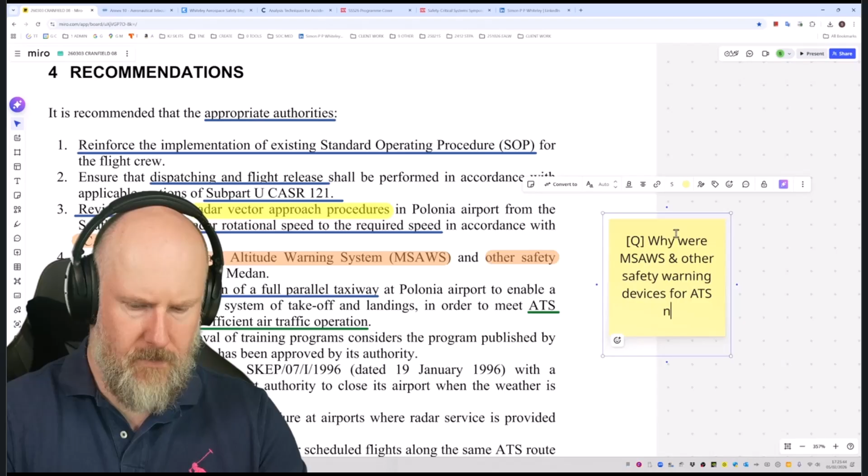Why was there no full parallel taxiway at Polonia Airport? Why was there not already a full parallel taxiway at Polonia Airport? Because there may be some very genuine reasons why that was. I think it kind of distracts a little bit away from the main reason this accident occurred, and that is related to air traffic control and aircraft control, flight path control. But that could be a contributor to other accidents or potential near misses.

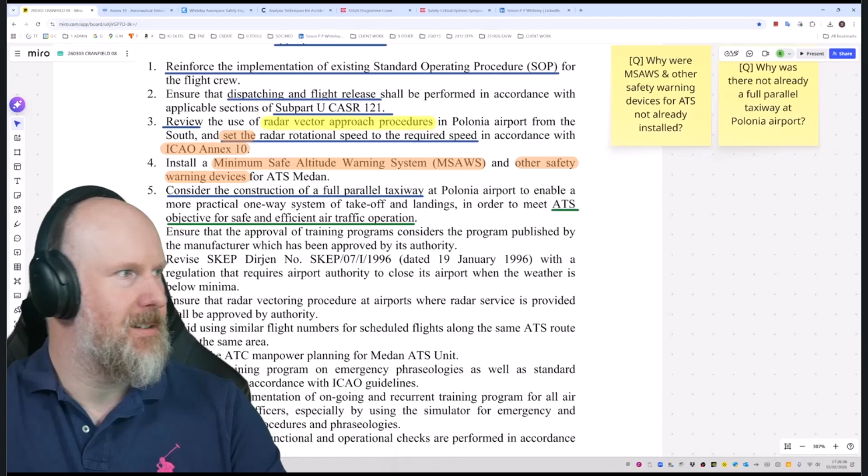Okay, so ensure the approval of training programs considers the program published by the manufacturer which has been approved by its authority. Program published by the manufacturer. Right, so...

Approval of training programs. So who does the approval of training programs? So let's put a logical controller in there. So, pilot training program management. So what were they thinking with regards to these training programs and the decisions?

Did they consider the program published by the manufacturer? If not, why not? Why did it make sense for them to behave the way that they did? Again, for me, that is a hot topic that should be explored using the control structure model.

And I know in the case of the 737 MAX, I know a little bit where they tried to certify it as essentially a new, not very different version of the previous 737. And of course the training and conversion training and everything else was designed to be smaller and shorter, and they missed out, with hindsight, key information about the MCAS. Now I don't think that was an airline making those decisions. I think that was Boeing itself. But it's a similar sort of thing.

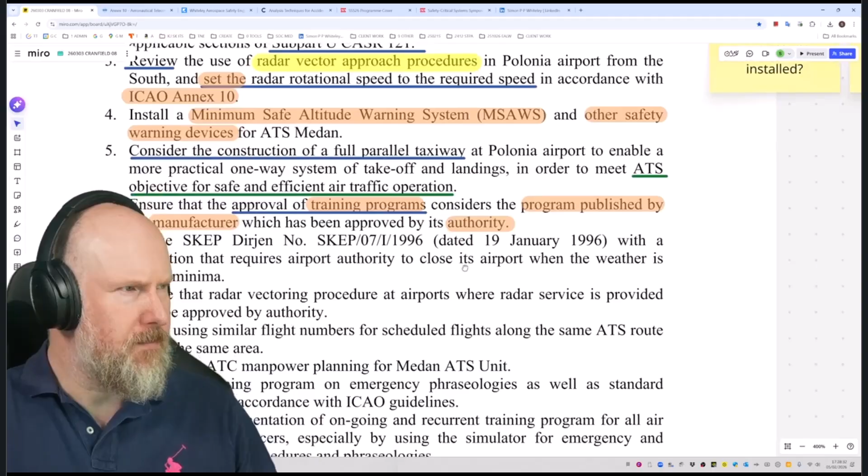Right, revise the procedure with a regulation that requires airport authority to close its airport when the weather is below minima. So this is interesting because when that standard is mentioned, where is it? Where is it?

So this SKEP/07/I/1996, runway may be closed, and that came from the Indonesian government, the Director General of Air Communications. So why was it 'may'?

Why did it make sense for it to be 'may'? And is there an implied trust that the airport authorities across all the different airports in the country will behave with a respective risk mindset, as in we've got visibility, the government procedure is saying 800 meters, we've got 500 meters, we should probably close the airfield.

Why is that not investigated? What is the control structure around those airport decisions? And again, they've said, well, we need to change this from a 'may' to a 'you must'. So that is, again, the decision making by the Indonesian government. Why did it make sense to treat it as a 'may' and not a 'must'? What is the decision making behind that?

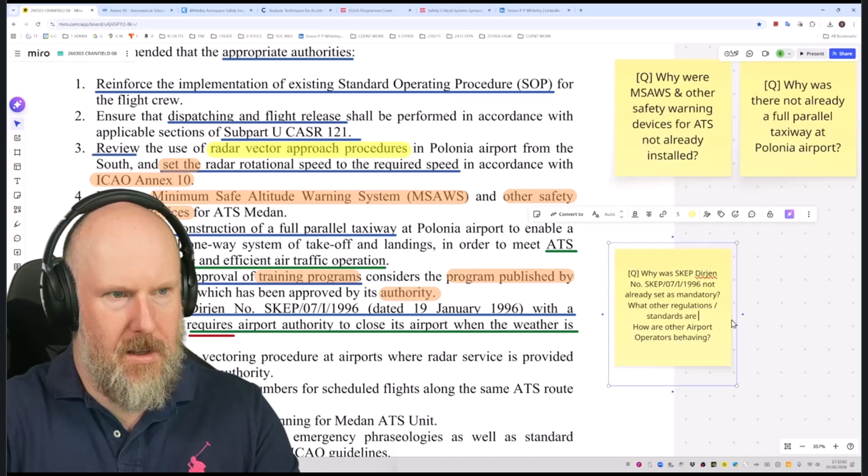And what other regulations, standards... it's not 'require', is it? What's it called? 'May'. What other standards are 'may' instead of 'must' that might present safety issues?

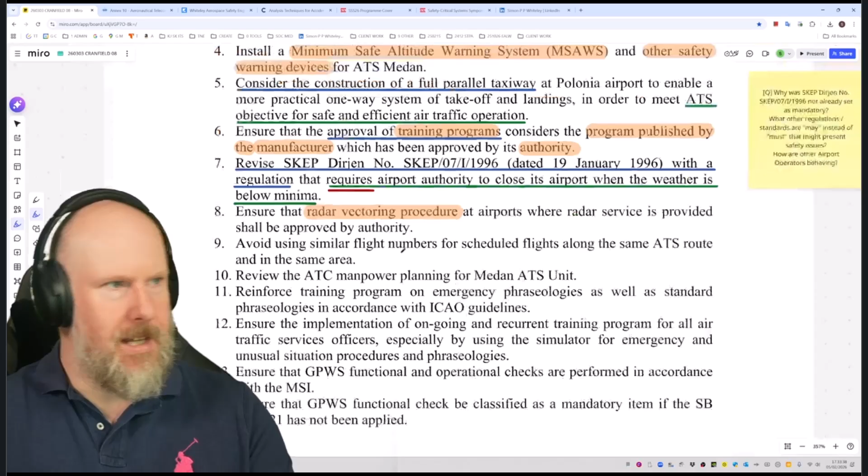At airports where radar service is provided shall be approved by authority. Oh, this is an interesting one, everybody. Right, so this suggests that... where is it? Let's just set this procedure for a minute. Let's put it there. Let's steal the air traffic controller over here. Let's put that one over here like that. I'll zoom in so you can see.

So I'm just building a quick control structure model. So there's a vectoring procedure - just ignore that, it's not a controller, it's just there for convenience. For those that are really specific about building models, that's just there for convenience, it's not a controller. Radar vectoring procedure, radar controller, and then we've got the airport authority. Let's put them down there like that. And then the airport authority.

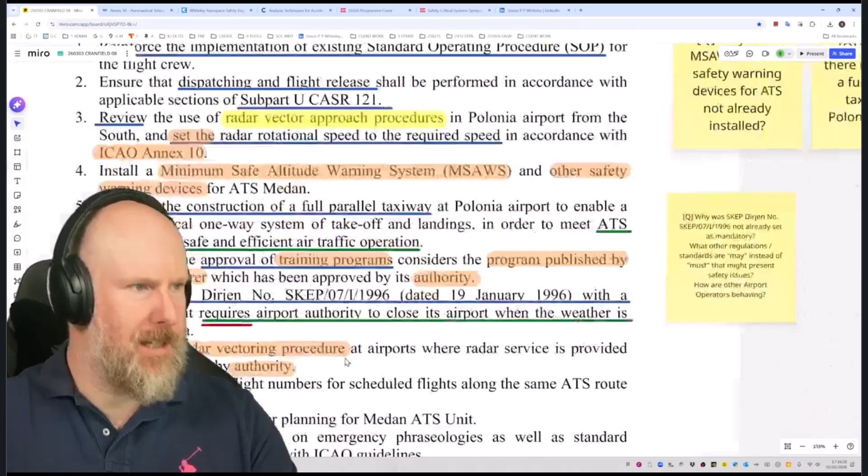Right, so is it airport authority or is it some kind of government ATC regulatory authority? Right, let's just steal some of these arrows, make it look make sense. So we've got a radar controller controlling the airspace. They receive information back from the airspace as feedback. In fact, let's just make this box a bit smaller.

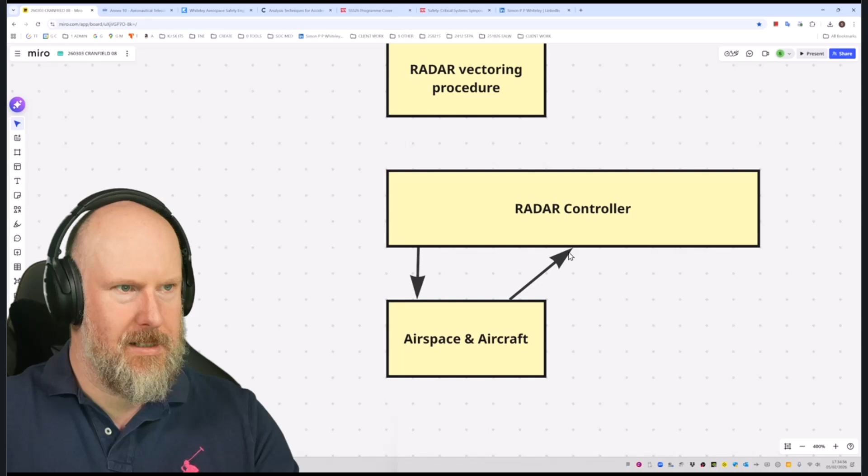There we go. So the radar controller provides control action to aircraft in the airspace. And of course, if they do that badly, that's going to contribute to accidents, whether it's controlled flight into terrain or obstacles or mid-air collision potentially. So it's really important. Now, of course, they're going to have this procedure, which is not a controller, so just ignore that, it's not a controller, everybody.

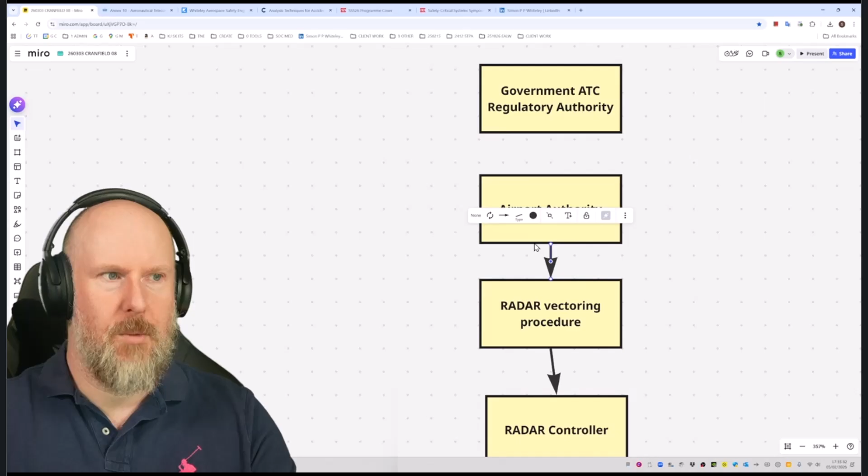And of course that airport authority should, in theory, have set that radar vectoring procedure. But they should also be checking whether that procedure is adequate or not. There should be some kind of feedback to make sure that the procedure is good. And then of course, perhaps they should also be getting feedback from the air traffic controllers themselves to say, hey, how's this procedure going?

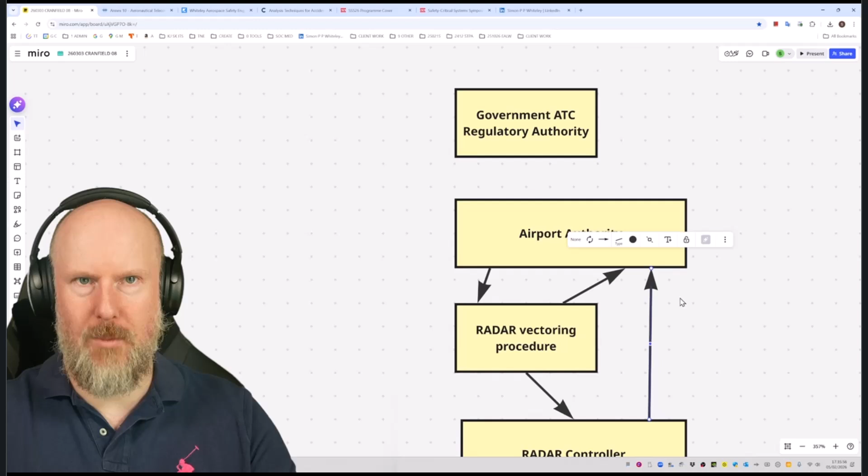You know, is it actually working for you, or is it difficult to use, or is it dangerous? Have you had some near misses? So there's that feedback path.

And then, of course, there's the regulatory agency. So they should be saying, hey, these are the kind of things that you should be doing as an airport ATC authority. And we want some kind of feedback. Maybe they do an audit of some description. But, of course, they might also independently review the procedure itself.

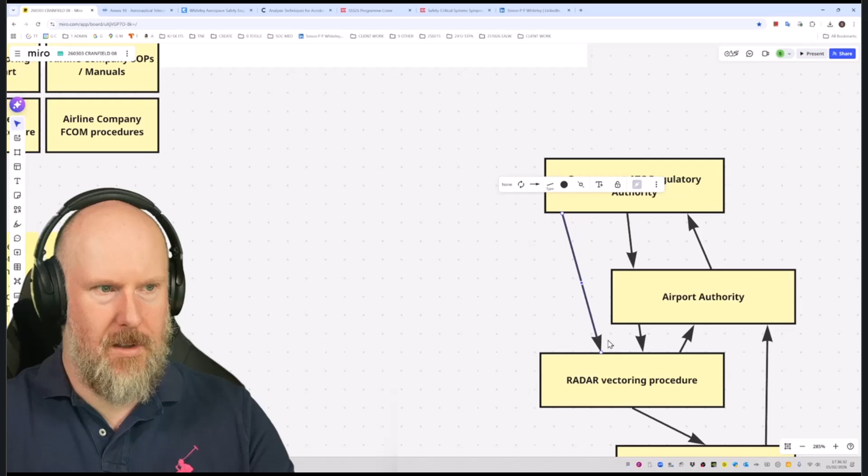So let's just build this model quickly so you can see. Oh no, that's the wrong way around, isn't it? I should have asked you to spot the deliberate mistake then, but there we go.

So let's just make these arrows vertical so it's a bit more pretty on the eyes. You know what I said earlier on about the modelling? It's a good idea to make it look good because it's less effort on the brain, less effort on the cognitive system of the audience. If you make it look nice and simple and clear, if it's untidy, it does make it more difficult to understand. So, oh, there we go.

So like that. So now again, the regulator, they might also have some kind of feedback about the actual conduct of flights. So they might have some kind of feedback from the actual airspace. Maybe they monitor the airspace. Maybe they get feedback either directly or indirectly from the airport authority.

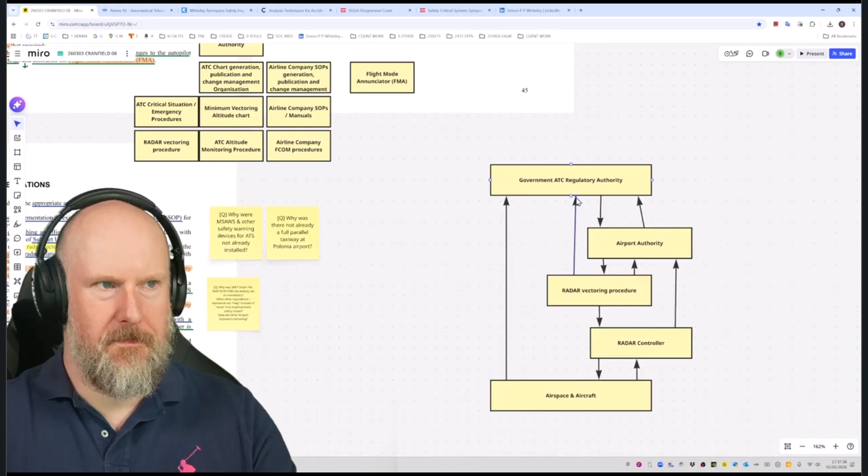So I'm hoping you can see, just from building a quick dirty control structure model like this, the topic of radar vectoring procedures. I'll just make that a different colour so that people don't get upset that it's not a controller.

The radar controller controls the aircraft in the airspace. They're supposed to use a radar vectoring procedure. That airport authority should provide a safe procedure, an appropriate procedure, and they should assure that that procedure is appropriate. And then again, they should also get information back from the radar controller.

In fact, actually, there's a missing feedback loop. Can anyone guess where it's supposed to be? I'm just about to draw it. Here we go, look. Oh, broken. Making my models look a mess. Oh, it's so annoying.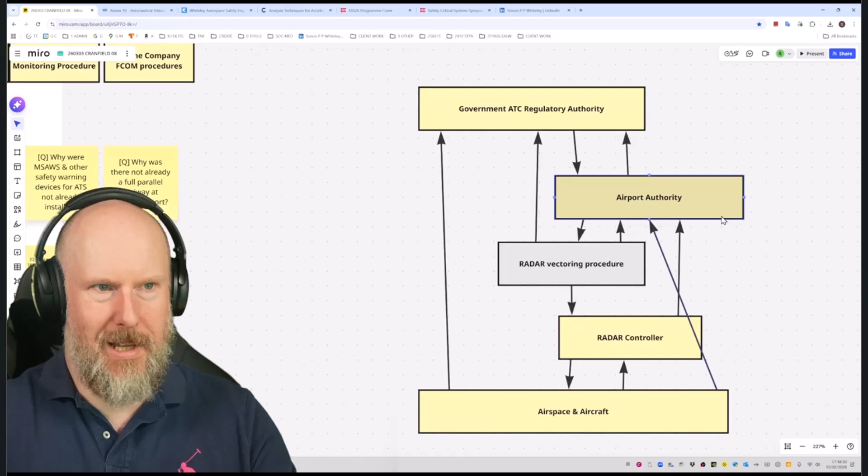There we go. What about the airport authority? Maybe they've got direct feedback about the airspace. Maybe they're monitoring what the radar controller is doing.

So yeah, from that one little thing, we're able to build a model and start asking some very detailed questions without knowing the detail of what's inside these controllers. I hope that makes sense and is giving you some ideas. Stick it in the chat. What sort of ideas has this spawned in you? What do you think to that?

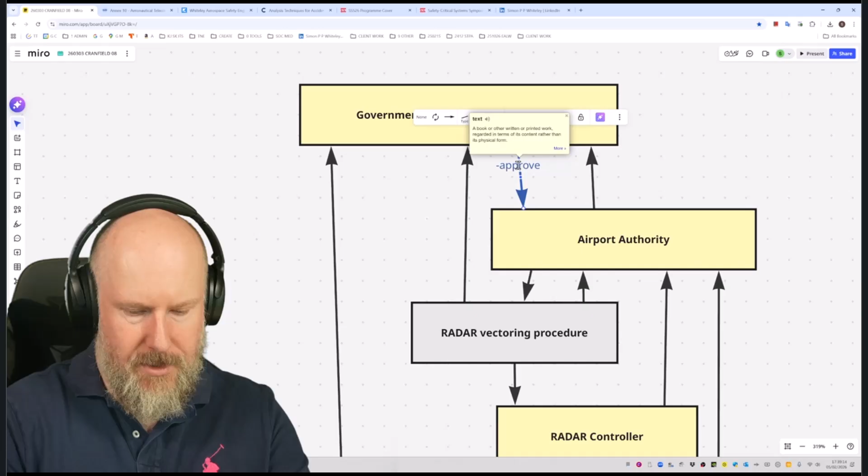Radar vectoring procedure at airports where radar service is provided shall be approved by the authority. So the procedure being approved by the authority is this control action here. So this is approve procedure. But of course, for them to be able to approve this procedure, they've got to have visibility of the procedure for review. There we go. And they will create the procedure. I can't spell. There we go.

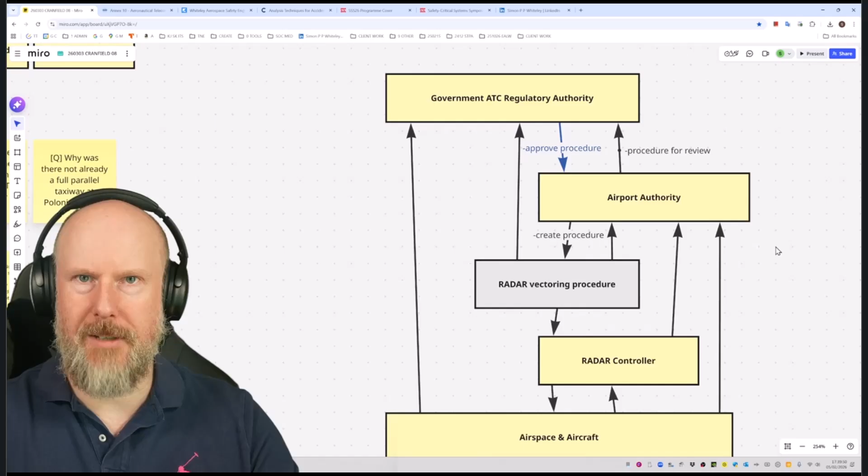Does that make sense? Is that sort of clear enough on the screen for you? Because I don't know that much about air traffic control and operations. I'm just showing you the logic of what a basic control structure might look like and how you would go about building it in the context of a procedure.

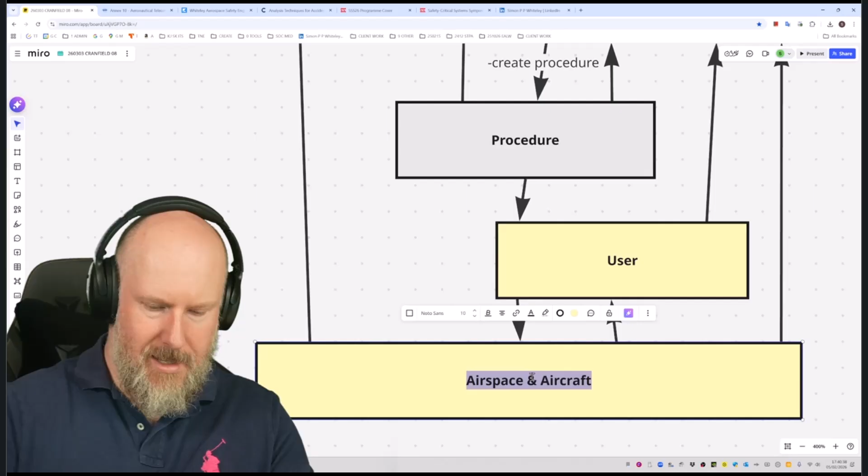And I'm sure in all the organisations of everybody who's watching this, you're going to have some procedures and guidance. And I'm hoping you can see that this model is essentially user, leadership, oversight. Does that make sense? Yeah. Oh, yeah, so control process is the activity. Yeah, there we go.

So what I'm going to do is copy and paste that, and I'm going to undo all those weird and wonderful changes I just made. And I'll put it at the side so it's a more generic version. There we go. Anyway, right, let's keep moving.

So number 9, avoid using similar flight numbers for scheduled flights. I mean, that is kind of obvious, goes without saying. So why were they using similar flight numbers?

Why were similar flight numbers permitted? This is for scheduled flights, by the way, along the same ATS route and in the same area. I know that type of hazard is recognised certainly in the UK and Europe, and there's a lot of very smart people doing smart work to minimise the potential for that happening. Given the complexity of the air traffic management system and all the moving parts and all the different airlines, it's challenging, but they do a fantastic job at it.

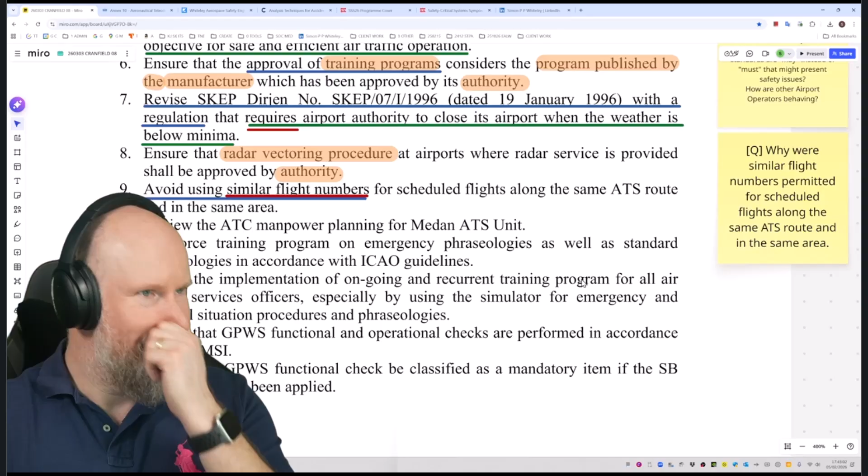Okay, fantastic. Review the ATC manpower planning for Medan ATS unit. Okay, so let's have a look. ATC manpower planning. So what I'm going to do is put ATC personnel planning, and move that out of the way. I'm going to put it there. So, personnel level setting,

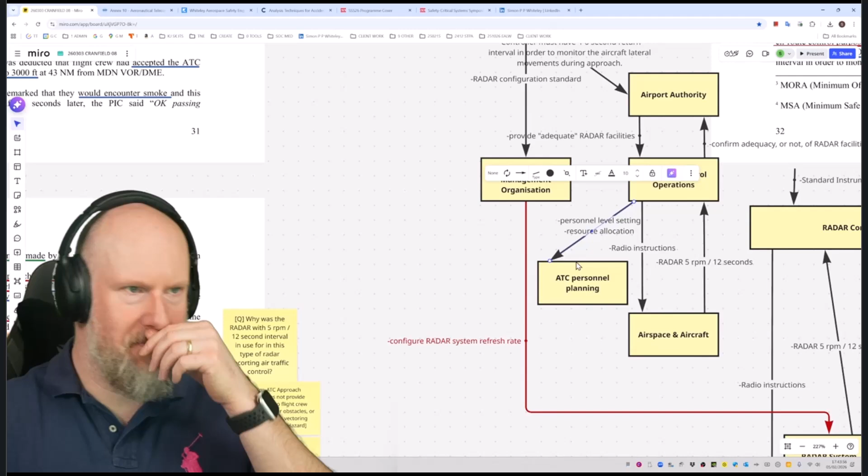resource allocation, and then we're going to have feedback. Oh, that's what I should have done earlier on. It looks a lot smarter if I do it like that. There we go. Right, so ATC personnel planning, personnel level setting, resource allocation, and then this is personnel level requirement.

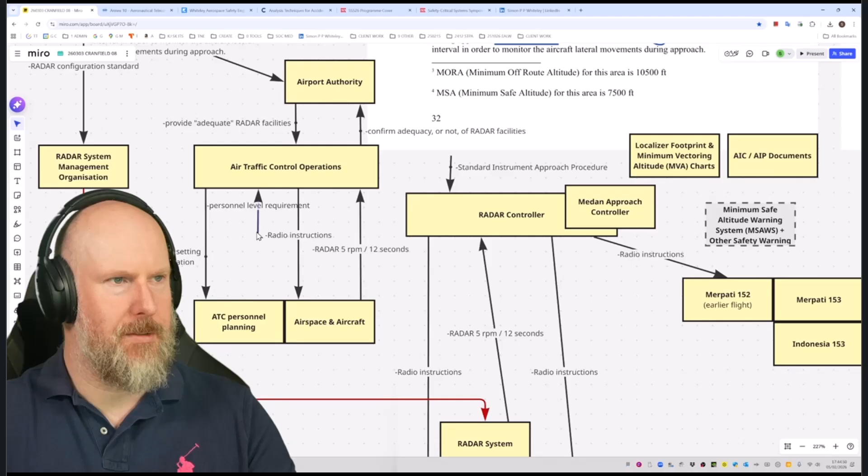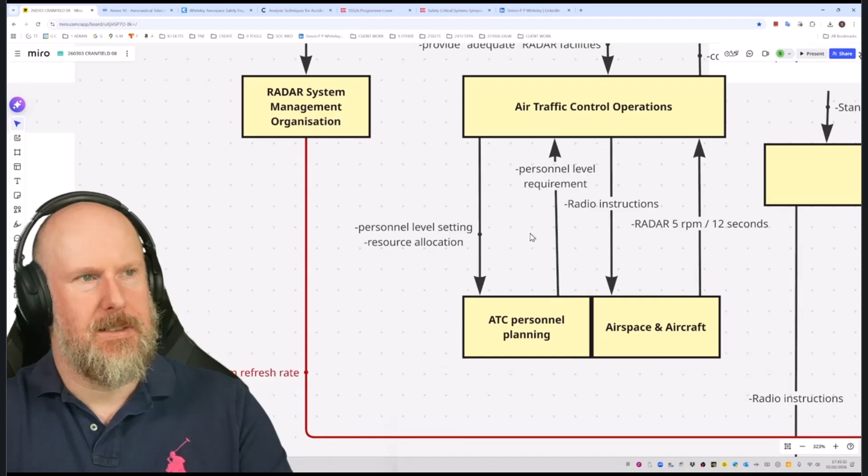So yeah, what is the demand, personnel level requirement? And then, of course, what is the personnel level setting and resource allocation? I mean, that's just a very basic loop, but I'm hoping it gets the point across.

Right, so reinforce training program on emergency phraseologies as well as standard phraseologies in accordance with ICAO guidelines. Again, when we're saying reinforce the training program, that's not really getting to the point of why they weren't suitable in the first place. So let's put that: ATC training program management. And that ICAO doc 4444, isn't it? Let's put that over there: ICAO doc 4444 for standard phraseology. And that should go to the ATC, so that's ICAO doc 4444, which sets the standard for phraseology, and then, of course, ATC training management.

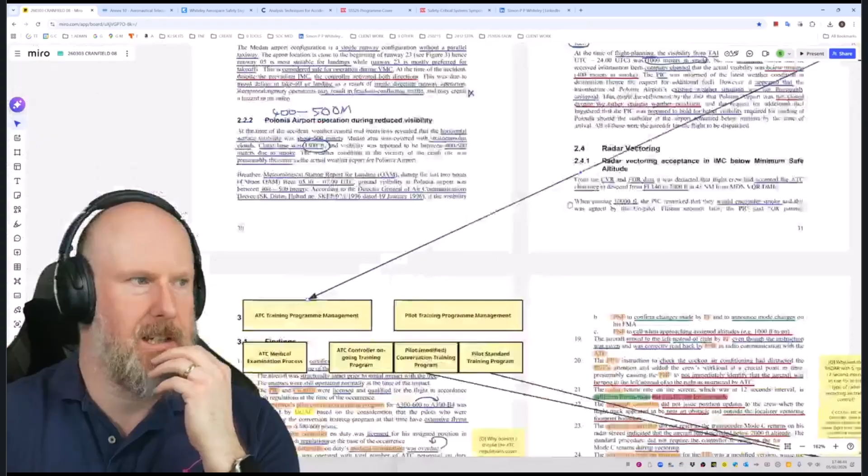Why wasn't that phraseology passed down? Why wasn't there feedback from the capability of the crews? The ATC controllers dealt with big questions there.

Okay, what else? So we've got: ensure the implementation of ongoing and recurrent training program for all air traffic services officers, especially by using the simulator for emergency and unusual situation procedures and phraseologies. So I'm guessing that there wasn't one implemented, so why was that?

Why was ongoing and recurrent training program for all ATS officers not apparently provided effective?

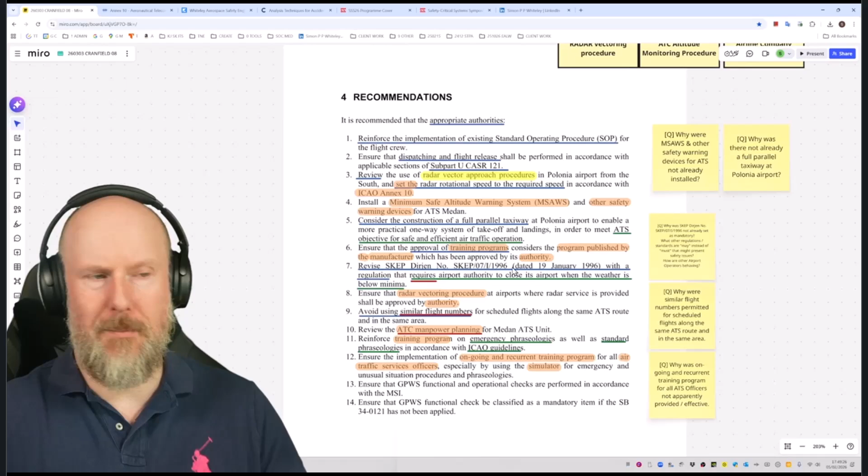Ensure that GPWS functional and operational checks are performed in accordance with the maintenance system. We talked about this earlier, didn't we? Should consideration be given to the control loop for GPWS? What is the control structure for providing the GPWS operational check?

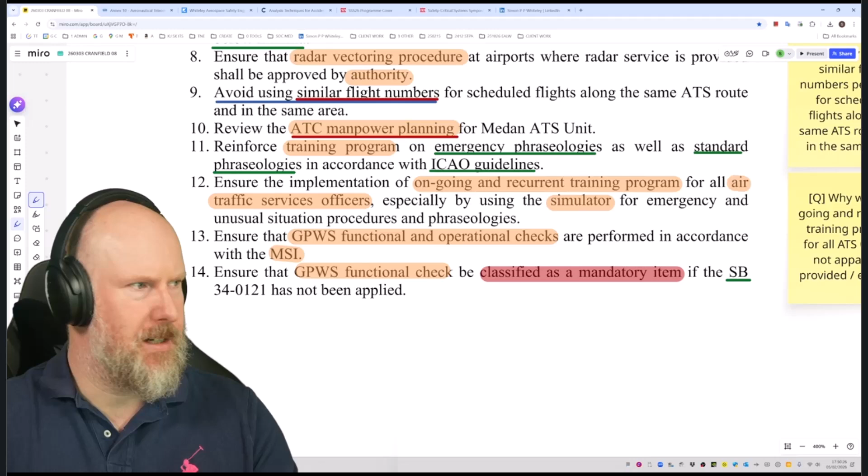What about autopilot aspects? Yeah, because we didn't really talk about that, did we? Right, so last one, everybody. Ensure that the GPWS functional check be classified as mandatory if the service bulletin has not been completed. Okay, so that's interesting.

So there is a question over the maintenance organisation, and I've not put that in the control structure yet. I probably should include it. Where would we stick it? We need to stick it under the airline, don't we? So that's the aircraft side of the control structure. And then we've got the airline side of the control structure.

So there's the engineering directorate. Presumably they're responsible for maintenance of the aircraft. So what are the control actions and feedback around GPWS and autopilot related aspects? So why was that functional check apparently not done or not documented?

And how can we address that? Yeah, okay, so we can do that. And then again, if the service bulletin has not been applied, so if we're looking at the control loop for that maintenance organisation, the service bulletin, is it applied or not? And that should affect their control actions. So how are they managing service bulletins?

And again, this might be just one isolated issue with this one aircraft. Or it could be a fleet-wide issue. From a safety management system perspective, this could represent one instance of a common theme that should be explored and considered. So yeah, that's it.

And of course, if you want to meet in person, I am going to be speaking next week at the Safety Critical Systems Club event, which this year has been held in York. York is a fantastic city. Of course, I would say that because I'm a Yorkshireman, but yes, if you are in York, it'd be great to see you and have a conversation and chat. There's going to be a lot of great presentations going on, a lot of great talks. I always enjoy going to these events because you meet the community and build up some friends and colleagues. So it's going to be great to be there and see everybody.

But I will be speaking on Tuesday, the 10th of February, and I'll be talking about addressing complexity using STAMP control structure models, and specifically STPA. But I'm sure from what you've seen today and in the previous live streams and videos on my YouTube channel, you'll see that STAMP and the principles it's based on can be applied to any kind of system, whether it's big and complex or relatively straightforward. But of course, the more complex and difficult the system is, the more fantastic the results are.